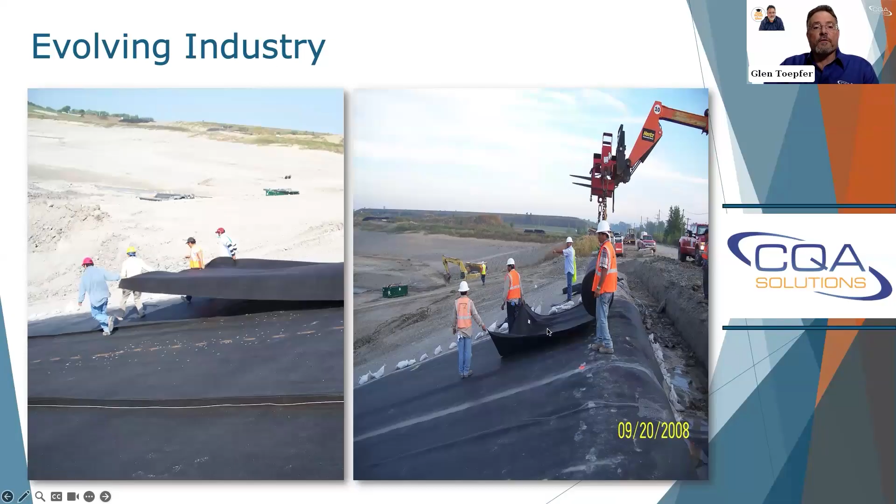You can see a more modern photo from 2008 - everybody's got hard hats on. I tried to find a picture from the 1980s but couldn't find any, so this is the closest I could find as a resource.

Fusion welders, thermal fusion welders - they were big and bulky. They often took two people to carry them, especially up and down slopes. They were hard to maneuver, especially trying to get through and around wrinkles and obstacles. Definitely much bulkier back then; they're a lot lighter today. I think the temperature, unfortunately, has been increased on the welders, which might be leading to some problems. But these are a lot easier to move and maneuver, and one person can carry them and perform the welding function.

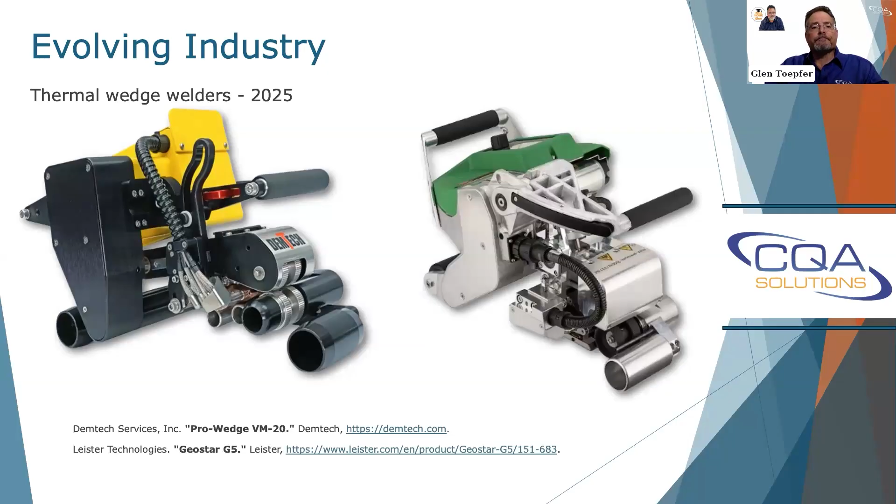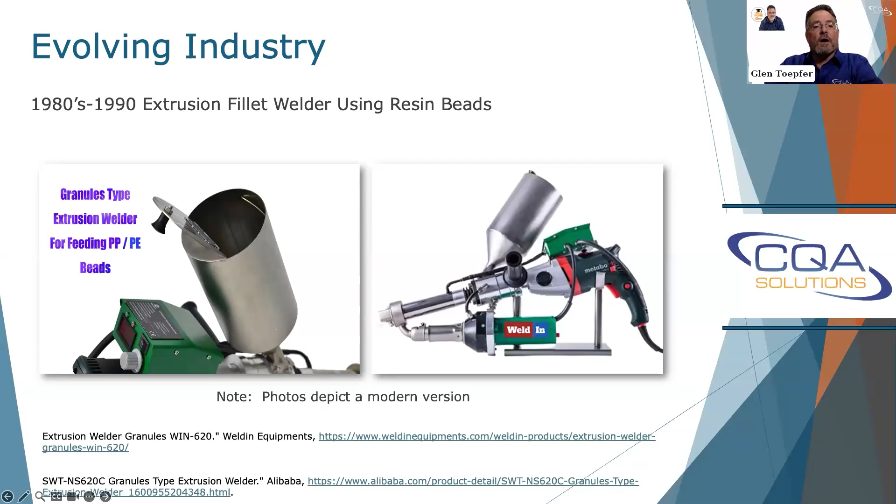When I first started, welding rod was coming into existence. Before that, you had canisters and you fed the extrusion welding beads in there, and those still produced good welds, but they were also a safety hazard because those beads got spilled on the geomembrane all over the place, and they became quite slippery when it rained or got dust on them. Unfortunately, this is a modern version that we could find online - I couldn't find any photos of the old style canisters.

These are the extrusion welders. They're a lot lighter than the ones that were out when I first came into the industry, especially the canister ones.

As I said, it's an evolution. We had resin beads poured into a canister, ground and molten, that came out the extruder. Then we went to hollow welding rod, which was pretty problematic in and of itself. Better than the beads, I think, as far as quality went, but both had issues with moisture and dirt, especially the hollow rod, with getting hot condensate in there if you had differences in temperatures.

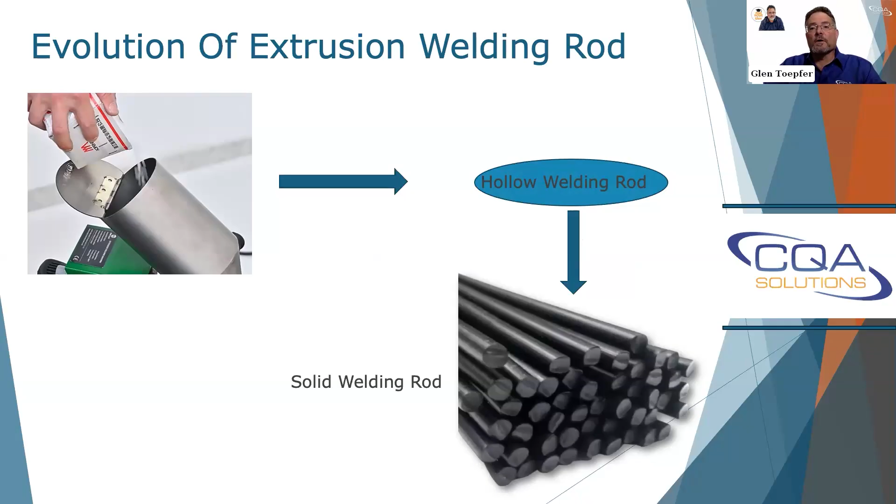So solid welding rod is what we now predominantly use, and I think that produces a much more reliable weld. But again, those are just meant to be examples that we're an evolving industry, and we're going to continue to evolve. So moving on to the owner at this point.

One thing that's important to remember is that even regulators who are approving this, the education level and knowledge varies in the industry significantly. You can have good regulators that are on top of it, and you're getting things approved with a higher confidence level. But you could have regulators that are new, approving this stuff, and they may have no idea what's good and bad. They may not do reviews.

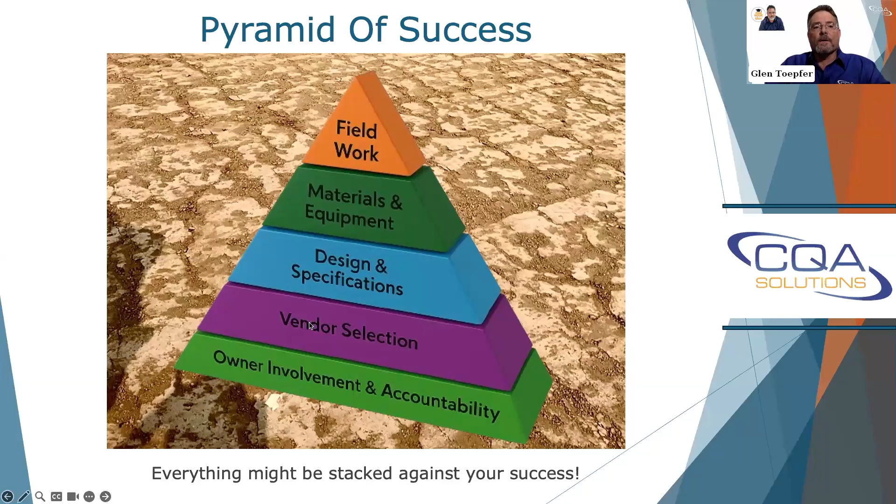In some states, reviews aren't done by regulators, which is hard to believe, but that's the case. And as an owner, ultimately, you're liable, no matter who's at fault, if there's an issue in the future.

So as an owner, some things we recommend are setting goals beyond just budgets and deadlines. What are your long-term quality goals? There should be goals as the project's constructed. Failure rates of destructs is one that comes to mind, something that you can have a tangible result on.

Vetting your vendors, making sure they have experience on similar projects, and then holding vendors accountable, which is done through daily involvement on the project. As an owner, if you're not out there keeping people held accountable, things can go awry pretty quickly, unfortunately.

And then that leads to construction documents, which I think are really, next to the design, the biggest hurdle that we have, the biggest challenge that we have.

We always recommend constructability reviews, because if it's not constructible in the field, unfortunately you end up with a field fit, and those field fits a lot of times are going to be inferior in quality than if it was properly designed. You're fitting something, you probably have poor welds, poor quality. If you can get it properly designed, the odds of improved quality are much better.

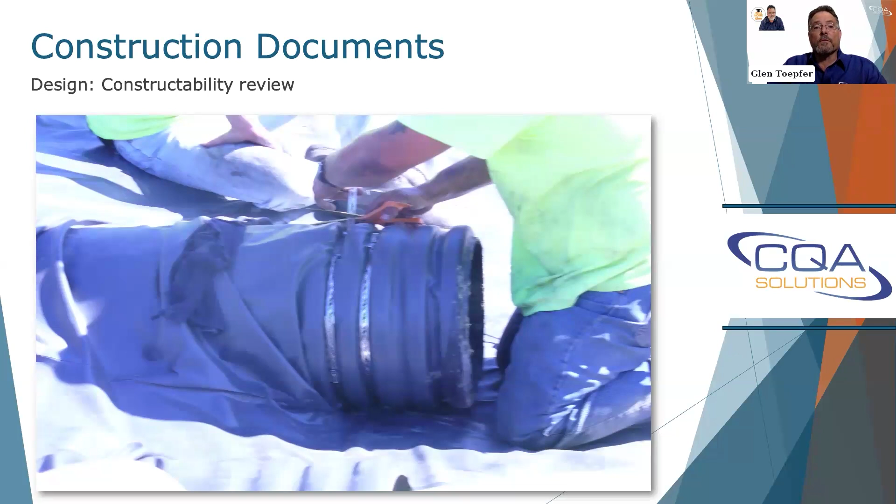And you also run into issues if you have regulators looking at your sampling frequencies and saying, okay, you didn't follow the CQA plan, why not? Or you didn't follow the tech spec, which was more stringent, why not? And they can cause delays in your certification.

The construction documents should also empower the certifying engineer and CQA team. Best practice: if you want it done, put it in the construction documents, in the tech spec, the CQA plan, wherever. If it's not in there, don't expect it to be done.

There's a lot of things that we see in the industry that aren't done because it's not in the specifications, and engineers claim they have no foundation to stand on. I don't necessarily agree with that practice, but it is what the regulator's going to be looking at. And if it's not in the document, they can't enforce it.

One of those things is, most specifications you'll see low ground pressure equipment is approved to work over top of the geomembrane - 5 psi, 6 psi, whatever it might be, pounds per square inch. But people will just push it over large wrinkles. So they drive over wrinkles. In this case, it was an ATV that met the specifications of 5 psi or less, and they drove over wrinkles all over the place.

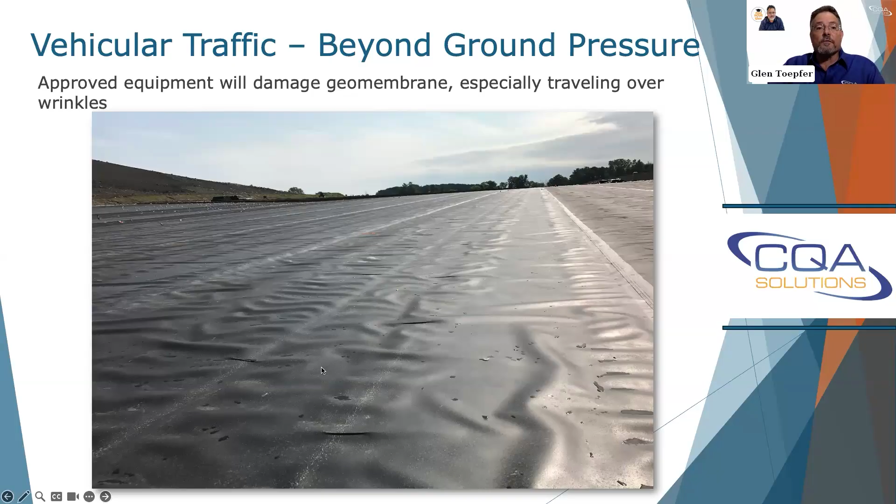You've got hundreds, thousands of these creases in the HDPE geomembrane. Creases are bad, they should be repaired. But again, it wasn't in the specifications. Also not in the specifications was that these type of damages needed to be repaired. So the engineer leaves it, and now the bottom of your cell is littered with all these extra creases.

Same thing with generators. We've seen creases caused by generators, especially the heavier generators with the hard rubber tires.

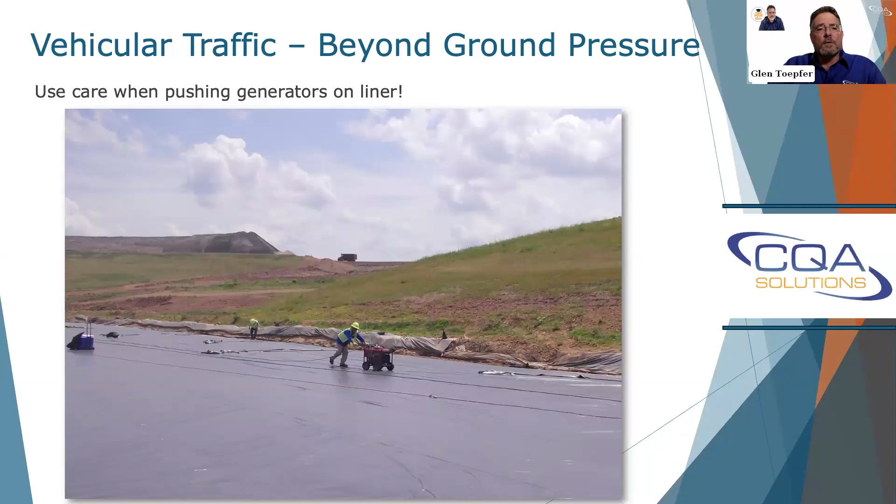And mechanical attachments and appurtenances, anything in the design—this is why we really stress the constructability review, trying to get these best practices implemented.

I gave this example in prior webinars, but you had an engineer that didn't know anything about the liner installation process, and a contractor that didn't know either. So they ended up, quote, nailing the crap out of the geomembrane to the forms. We ended up with hundreds of holes that shouldn't have been there in the first place.

Same project had issues with the corners in their design. They had welds that were supposed to be done right in the corner. Anybody who knows extrusion welding knows you can't weld right in the corner—even with these specialized nozzles people have come out with, you can't get a good grind in those corners. There needs to be good, uniform abrasion.

So the best thing to do is use prefabricated corners—get those welds out and away from the corners so they can be properly welded and properly tested non-destructively. It just increases your chance of having better quality.

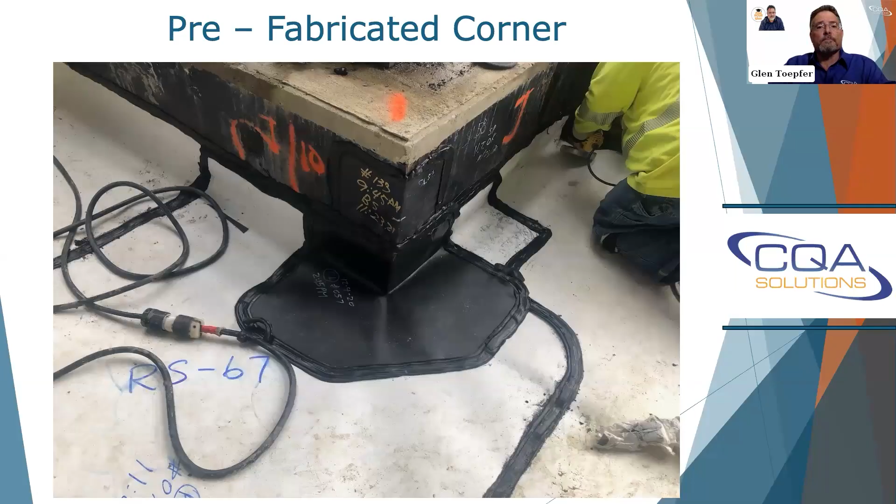Moving on to the pre-construction meeting—a lot of times, parties don't even do them. I've talked about that a lot in training and past webinars. But the party should be there.

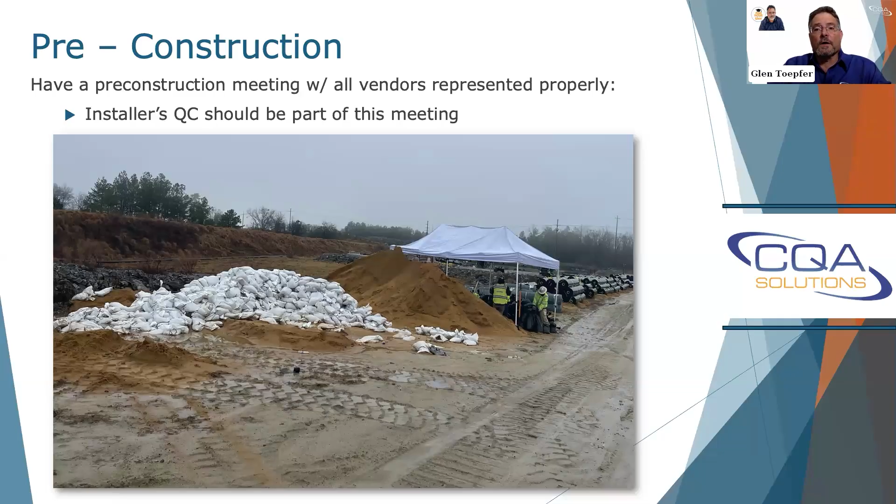CQA—this is a photo here—and the installer's QC should be there. We're driving up to the pre-construction meeting and the QC is helping do sandbags, not out there as part of the meeting. Often it seems like things said to the foreman don't get translated back to the QC, unfortunately, and it leads to the potential for problems on the project that aren't caught and should be mitigated.

Same thing with reviewing all the documents at the pre-construction meeting. Someone should come there as a best practice with a specification summary, reviewing your CQA plan, construction tech specs, and the drawings, along with a comprehensive list of requirements, making sure everybody's on the same page.

We see this not done quite often. GRI GM9 is a good example—it's a cold weather seaming plan, and everybody has it written into their CQA plan and tech specs. If the ambient temperature drops below 40 degrees or 32 degrees, whatever the cutoff is on the site, they're going to use GRI GM9.

Well, the temperature drops below that and everybody's scrambling to implement it. There are things in there that need to be approved by the engineer beforehand, and they're not approved, so the project comes to a delay. That can be a costly delay when you're trying to beat the weather, especially in cold weather and snow regions.

Safety is a big topic that should be discussed in pre-construction meetings, but often it's not. This is an example of a triangle of death, where you have a pulley system being used to pull a roll of liner—cable pulling with another piece of equipment pulling it through the pulley. The triangle of death is anywhere that pulley can break off and kill somebody, either the cable or the pulley.

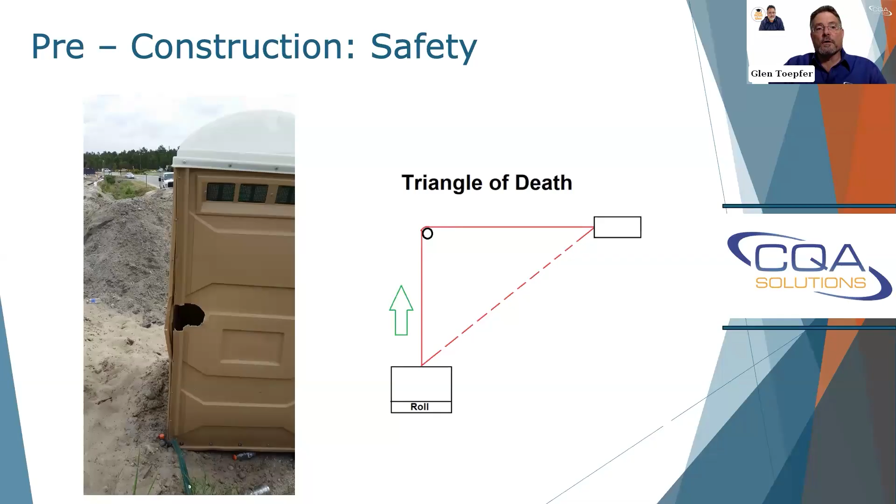More things on the pre-construction meeting: requiring supplemental or emergency work plans. I already talked about cold weather—there's also hot weather. What do you do with hot weather?

Early in my career, we worked till 2 a.m. trying to beat the rain on a project, and the crew started at the high end. I said, why don't we start with a sump? They said, no, we're going to work towards the sump. It didn't make sense to me, but I was new in my career. By 2 a.m. they shut off. They don't want to weld around the sump because they're too tired. So they left it open, came out the next morning, 4 hours later after it had rained, and it was flooded. We lost a GCL below, had to cut it open and repair it.

In that case, it might not be the worst thing that happened, because those guys were already too tired. They probably would have had poor quality welds anyway, but they should have started there while they were fresh. But things like that happen. That's why you need a plan.

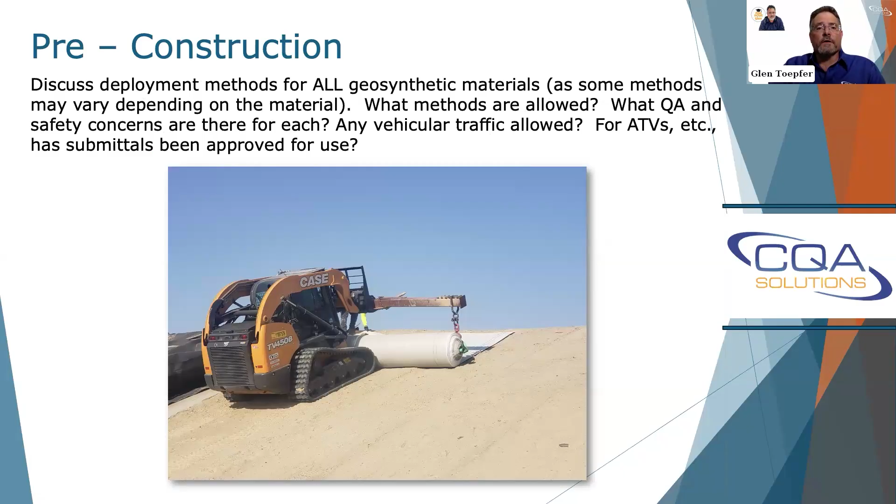Same thing with material deployment. This is often overlooked. How are you going to deploy materials, especially over top of other materials? What's allowed? I already talked about low ground pressure, but you don't want to drag materials over subgrade or over top of other materials. You get scratches and damages that often go unseen and result in issues in the future.

So I'll move on to earthwork now. One of the first things you get to on earthwork is your tie-ins. They're going to be exposed. Compacted clay liner, you're tying into an existing cell. I didn't go through the sequence and photos here, I just went with a final photograph, but you'd be benching into your clay as you build it up, and then you're going to tie in.

Well, this is all going to be exposed at the beginning of the project so they can tie in and bench in. When that material is exposed, somebody should be there to mark and record damage locations so they can be found again. The material's often damaged as it's exposed, and this material gets covered up. It might get silt running off in rains and be silted over. People will think there's no damages there when in fact damages may be there, and they're lost and nobody ever finds them again.

So if you don't mark them as the material is exposed, waiting, to me, is an inability to ensure all damages are located and repaired. Even if you're doing a leak location system, you can't guarantee a lot of times that you're getting over areas that may have had damage.

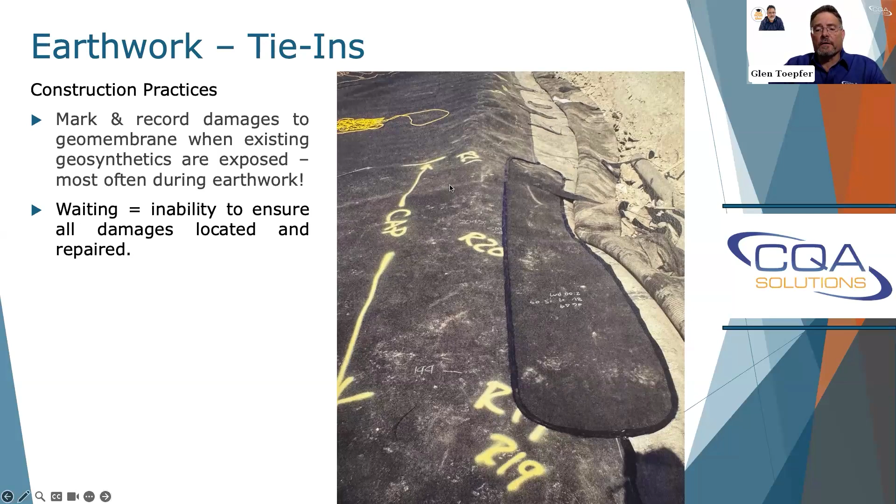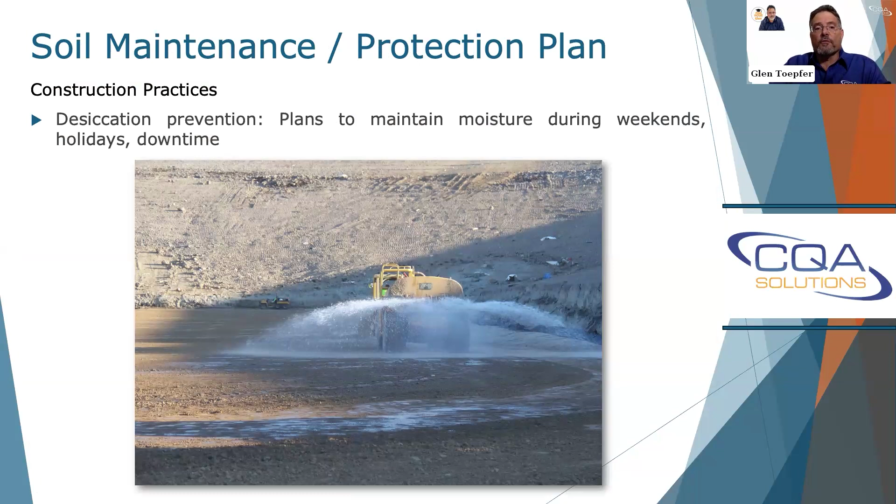Soil desiccation, this is another big one. It's preventable, but it's a big issue largely because people don't have a soil maintenance or protection plan when they're doing earthwork. What are you going to do during weekends to maintain moisture conditions, holidays, downtime? These things should be done. There can be a watering plan, but contractors don't want to pay their people to come in on overtime on a holiday weekend to add moisture. So what are some other options? If you're not going to do that, how are you going to protect it? These things should all be addressed.

Similarly, nuclear gauges, how do you confirm that the numbers you're getting are actually representative? I've seen projects run into issues that could have been avoided if you just took time to do drive cylinder testing of the moisture on a regular basis. Before the project, you can even do it on a trial area. Have the contractor do a little trial pad and test it out. Make sure you're getting proper results, because sometimes there's a chemical composition issue, something with the material that just isn't right.

The gauge may be wrong. I've seen it. And these things are all easily avoidable and can greatly increase the efficiency of your project if they're thought out and done before the project begins, or at the very inception of the project.

The world of construction stakes, it seems like we're getting to fewer and fewer construction stakes with GPS, but we still see them used on projects here and there in compacted clay liners. When it's a compacted clay liner and you're dealing with permeability issues, those stakes need to be removed. It used to be written into specifications that they needed to be removed, each lift staggered, things like that. But you don't see that much written into the specs anymore because GPS is there. So if you're on a project where construction stakes are used, you need to keep that in mind.

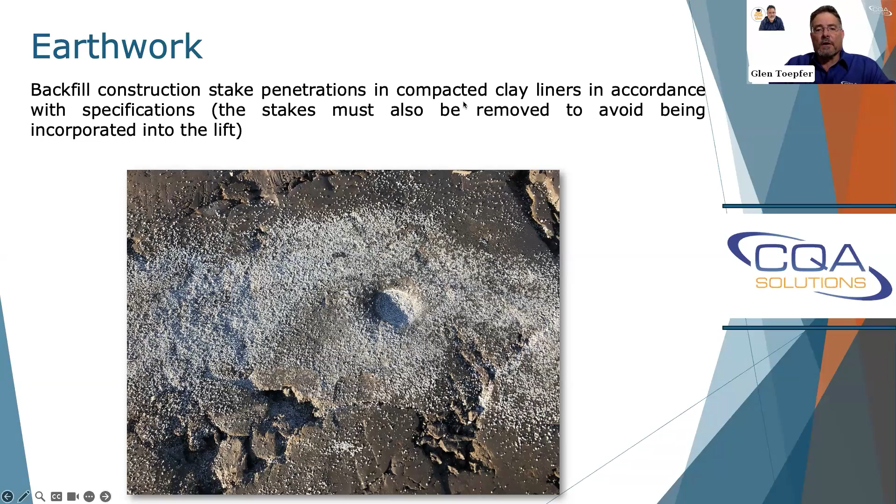So that's really the last of the things I have on earthwork. I'm going to move into all the different steps of the geosynthetics here for the majority of the rest of our time together. Materials, I like to warn people of this.

I've talked about it in numerous training classes, but beware of average test values. Look at the values, examine the values. A minimum required value can be misleading. You can make that minimum value, take the case of this break elongation.

You have 4 of the 5 coupons tested, over 110% of the required value, but yet you have one value at 44% of the required value. The overall average is fine, but what about this low number?

It's something that people need to look at. We've seen it on projects where these low values cause problems. They can be problematic for the welding, the installer doing their welding. We've seen where these low values in thickness sometimes combined with other values lead to problems with the welding, and people are blaming the installer when really it's the material itself that's causing the problem.

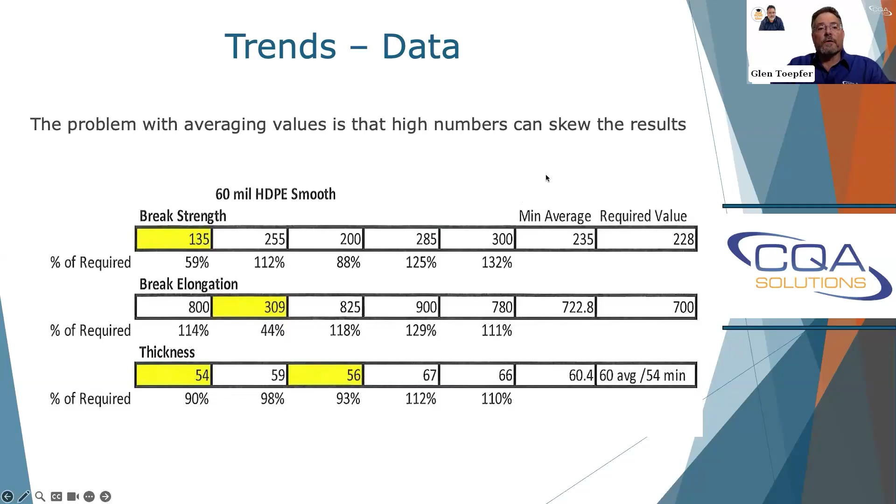What's acceptable? I can't really say that. I don't have enough background or experience there, but you need to look at it. What's an acceptable standard deviation, maximum value, minimum value? I think minimum values in some of these instances may be better than the average value, or an average value with a minimum value, or standard deviation, something to that regards.

That's just something that, best practice is to look at this stuff and maybe do some additional testing if you're seeing issues like that.

Then when it comes to doing your physical inventory of material that's shipped to the site, be aware of rolls that are missing in a sequential order. Most of the time nowadays, you're going to get production runs that are made for your site. You'd expect the rolls to be chronological in order, but if you see gaps, hooray, you should commend the manufacturer.

They probably caught something. But one thing a lot of people don't realize is, although they caught something, their testing is going to be at a certain portion of the roll, and that may miss if the issue propagates itself. We've seen that on projects where the issue's in the first footage of a roll, but it reappears later on in that roll or the next roll outside the rolls that are missing.

So just something to keep in mind there. You may want to do further examination. Might not warrant testing, but it definitely warrants your field people keeping an eye on the material as it comes out and seeing if there's something different there.

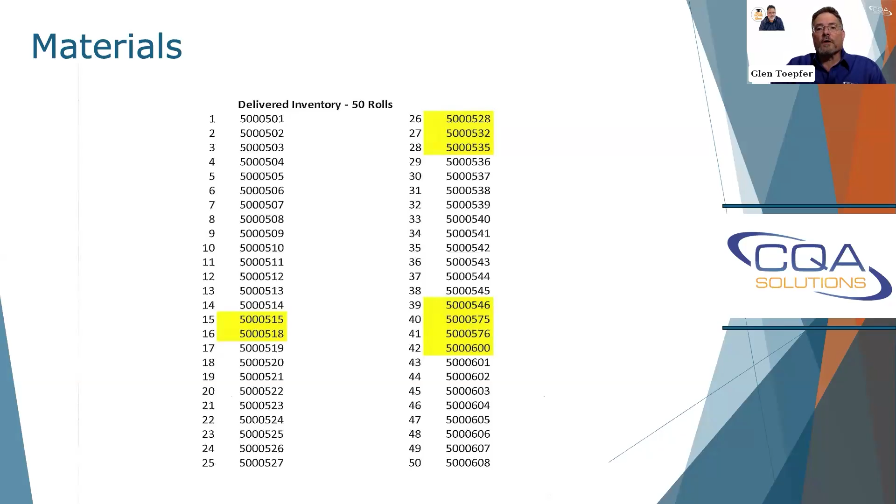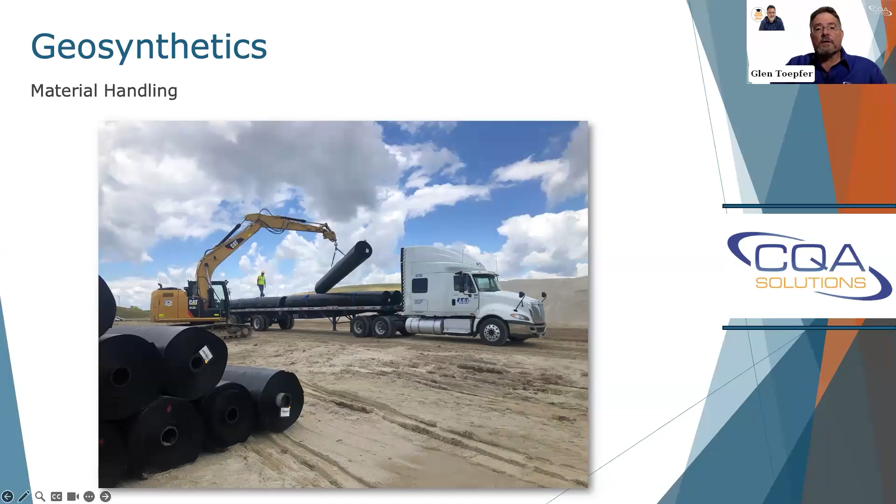It's going to be in the seam area. The installer is going to have to do a better job of seaming, cleaning the material, and it's something that's avoidable. Just take time to get it elevated per the manufacturer's requirements off the subgrade, and you don't have to deal with that issue.

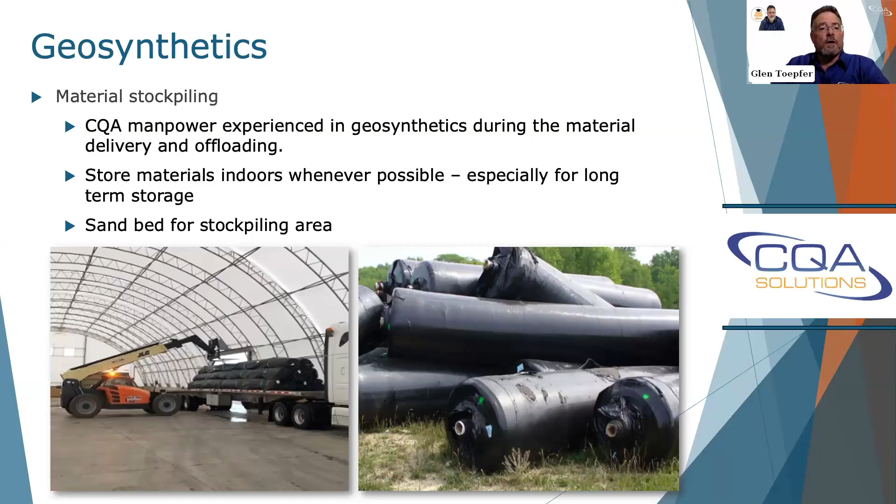Inventory control - I mentioned an approved inventory list. I was talking about looking at past examples of sequential rolls that are missing. Somebody should provide an approved inventory list that's used, and the technician should carry that with them. One procedure we use is having the approved inventory list in our electronic collection, so if a roll doesn't come up on the pre-populated menu, technicians know to take a look and ask why isn't this roll there. That's how we catch material issues.

You should have continuous updates daily, checking the material as you inventory it. Spray paint is a good way people use to mark which rolls are there and approved. We always recommend spray painting on the core, maybe on the face of the liner away from the edge of the sheet, but never on the edge itself, because the paint gets in there where they have to weld. Sometimes the installer can't clean it out, and now you have a bad seam in that area that can carry forward.

Mark 'do not use' on rejected rolls clearly, because inevitably they'll end up in a stockpile where people think they should be used. That's one way to avoid it - ideally stockpile rejected rolls separately, but people come over and try to cut it for repairs or use it as a rub sheet. Everybody says okay, you can use it as a rub sheet - well, now the paint marking gets lost and it ends up being inadvertently used. So the best thing is just to keep it out of there and not use it for anything.

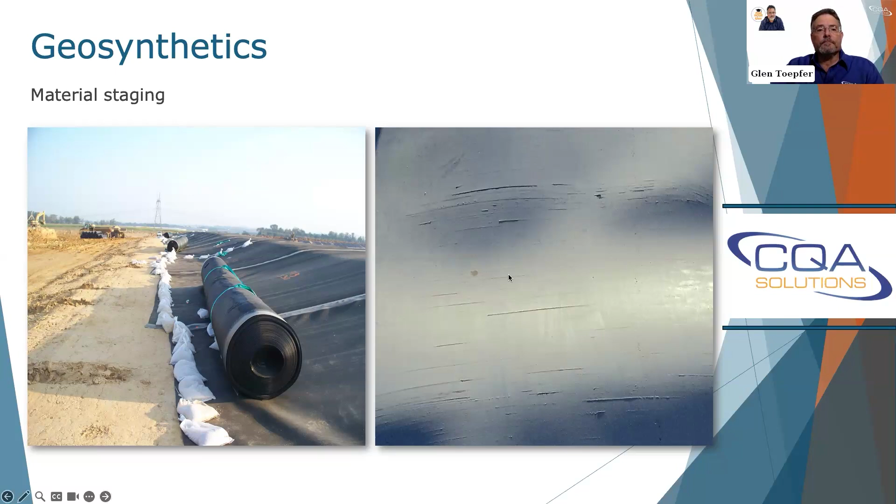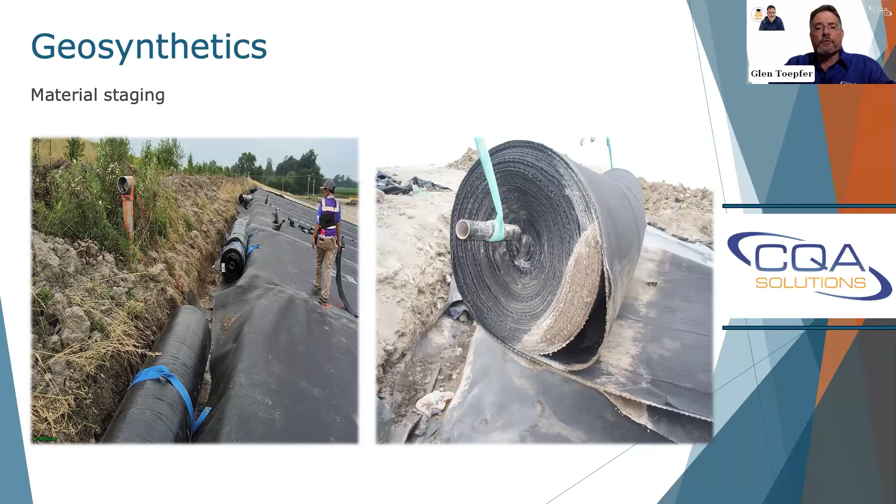Don't drag materials over the subgrade. I've said that before, no matter what material it is - if it's on top of a geomembrane it's especially true, and the same principle applies on top of a compacted clay liner or any other earthen subgrade. You want to lift the material up so it's not riding along the ground. You may have to put down a rub sheet, pull it out on the rub sheet, then slide it into place to minimize dragging. But these things all take time, and that's part of why they're not done. We end up with inferior products because of it - scratches underneath that nobody sees, and sometimes holes, because people step on things that got dragged in there. There's a whole host of issues with dragging materials on a subgrade.

Another issue we don't see as often, but some of these materials still use staples. Some are getting to plastic cores, but anytime you have material with staples in them, there's a risk of those popping off. The best thing is to control your deployment and then trim off the material.

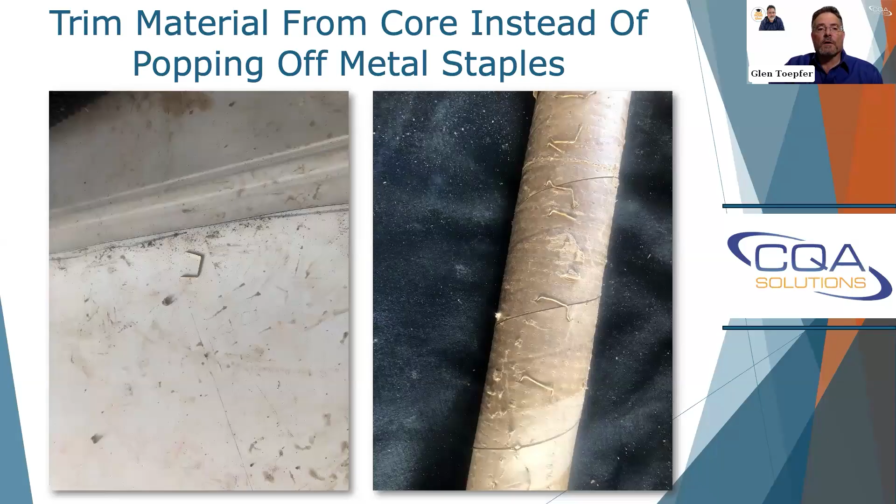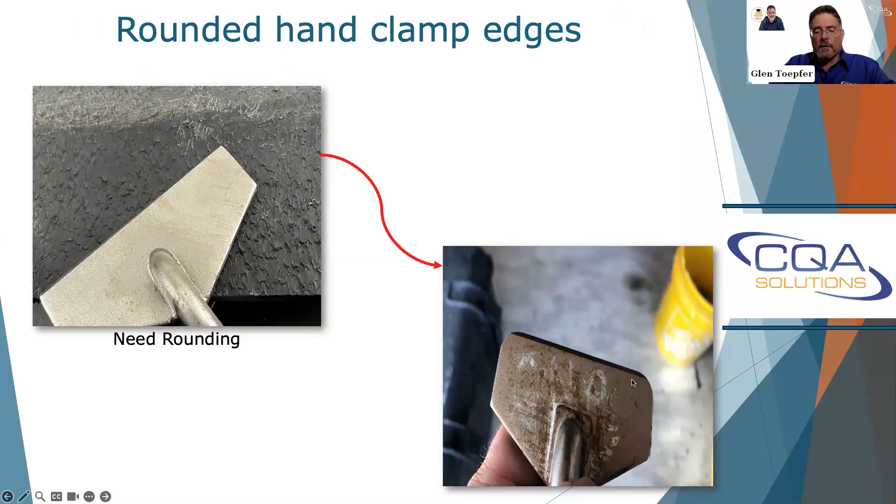This next photo is from a marketing advertisement from an installer, and they're showing clamps that aren't rounded, and they're showing damage right here as a result. That's what happens - you do get the damage.

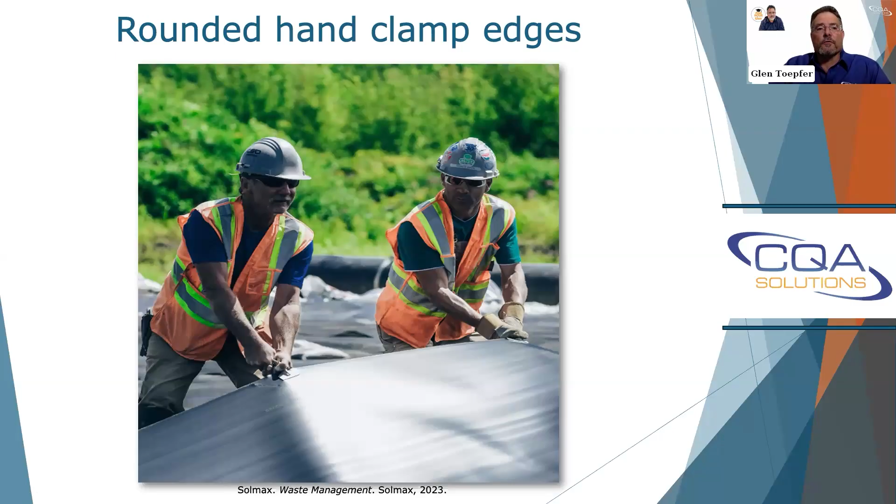This is one of my pet peeves in the industry - some of these practices, people don't care what they show on their websites or their projects anymore. You can look around LinkedIn, you can look at websites, you see it all over the place. Some of these things that are best practices, or even normal practices, aren't being followed, and it ends up with people looking for resources taking these practices as well - it's on my website, or we've seen it on somebody's website, so we thought it was a good practice. I think as an industry we really need to self-police that and use better care of what we're promoting out there.

I think I talked about this one in a prior webinar, but they spent four to five hours looking for this damage. It ended up being a 400, 500 foot seam. So they did isolation - cut a hole at 250 to see if they have air. They isolate one side, it's leaking, the other isn't. Then they go to 125 and kept isolating it down till they had a 4 or 5 foot section where they could find this, and they cut that section out. But now you've got two dozen extra holes in the liner. I suggested they should just cut out the seam there and replace it instead of putting extrusion patches on, but they didn't. So now we've got an extra two dozen inferior welds out there that we didn't need, all because somebody had these hand clamps, plus the lost time.

Gridding seams and panels, regardless of whether you're using GPS or not, gridding is still a viable practice. You want to keep your paint or whatever marking you're using away from the seam - it shouldn't be right on the edge - so there's room for repairs if needed. That's one way you can quickly reference damages, and ensure everybody else on your team uses the same measurements. You may not use the same measurements as the installer, but from a CQA standpoint, using the same measurements means everything at one location is referenced to the same measurement, and you don't open Pandora's box.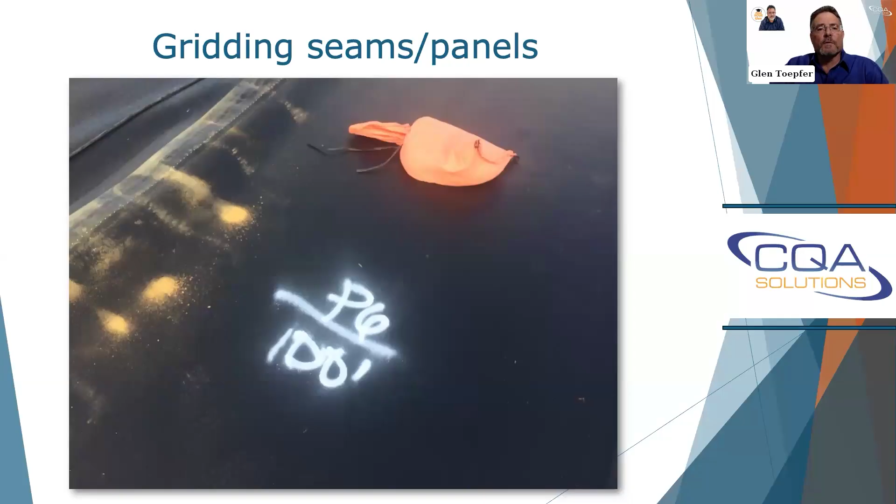Is that 2 foot repair at station 35 really the one that was at 30 feet by somebody else? It just is a better way of doing quality control anyway.

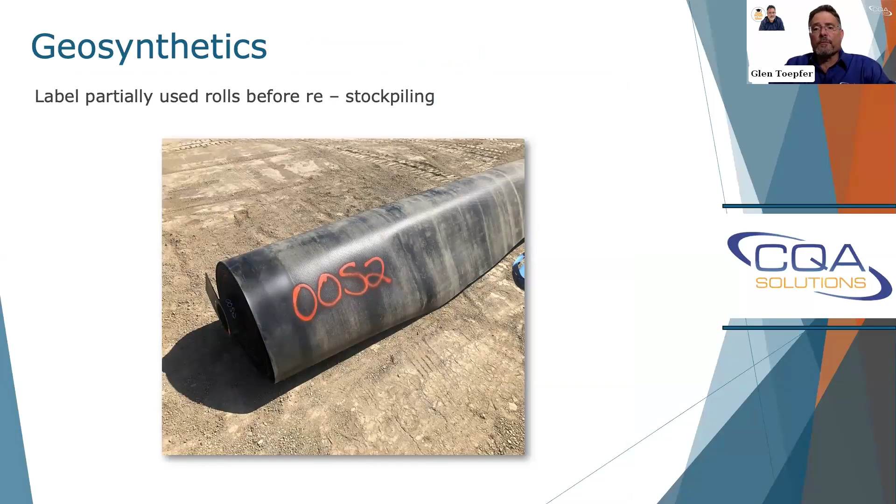Partially labeled, labeling partially used rolls. This is critical. I think it's not done often enough. It used to be in all the specifications, but again, it's something that seems to have slipped in a lot of recent specifications that we're seeing.

Labeling the corners with a panel ID. This is especially important when you're having people that aren't familiar with a liner, like a third-party surveyor, come out there and do the as-built.

In this case, the paint mark should have been placed further away from the weld so that it's not in the way if you're doing a repair. But it's handy to mark these, and a lot of times the surveyor is not going to look around to try and figure out what panel they're on. It makes it a lot easier for them.

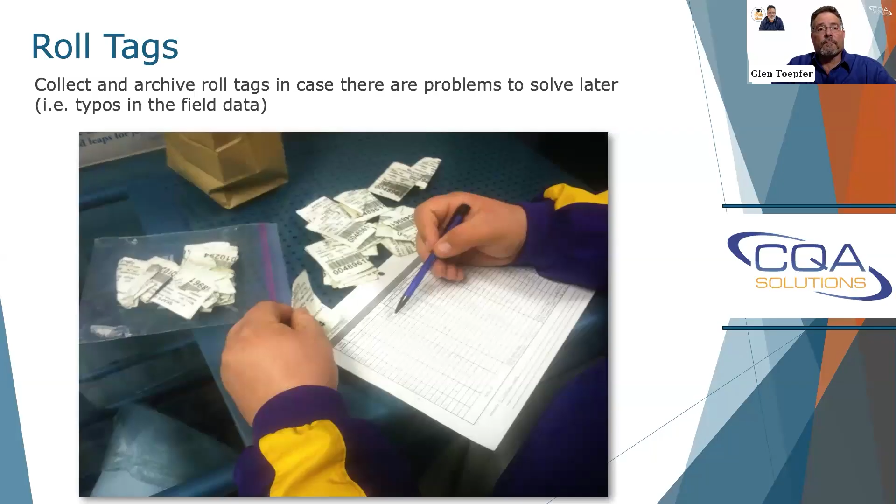Roll tags, collecting roll tags as a CQA, I believe this is critical. This is something that you should be doing to help figure out what rolls and panels were used that day, so you're always on top of your inventory control. We found it to be very helpful in our field experience.

Trial seams, moving on to the trial seams, a lot of specifications don't really deal with your starting peel incursion. Everybody goes by the GRI GM19A, that 25% peel is allowed on your D-strips, but what peel should be allowed on your trial welds? My argument is always that you should start at zero.

You always want to start with the best weld that you can and allow the most flexibility in case something goes wrong. You don't want to start at 20% or 25% and then have all these seams failing because you started close to your limit. Just a best practice that we've seen.

A lot of people incorporate this one now, but people don't write it into their specs, unfortunately.

And you start seeing more of these breaks, and they're at the edge of the weld. What we've learned as an industry is that part of that's being caused by this overheating that's going on in the industry. As I mentioned at the beginning, earlier versions of fusion welding, the thermal welds, wedge welders couldn't go as high. They didn't go to the temperatures they do nowadays. And that may be part of the reason.

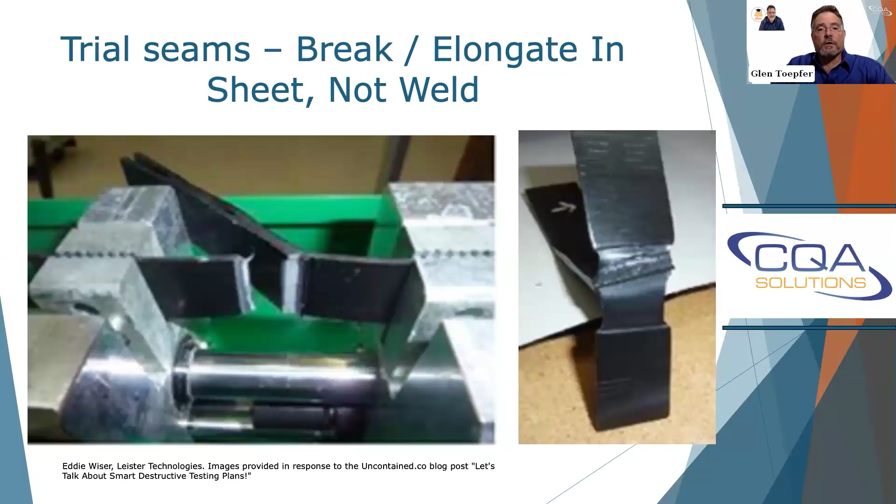We're still evaluating this. There was a big panel discussion at Geotechnical Frontiers earlier this year. We're trying to address what needs to be done. How do you stop the overheating, because you're getting passing peel and shear, but you're compromising the geomembrane?

Along the same principle, you want to do your trial welds on the subgrade. This is another one where you don't see it on the specifications as much as you used to, and it can be problematic. You end up in arguments, and you end up with engineers saying, hey, I can't enforce it, it's not in the specs, but somebody should have put it in there. Somebody should have put it in the CQA plan.

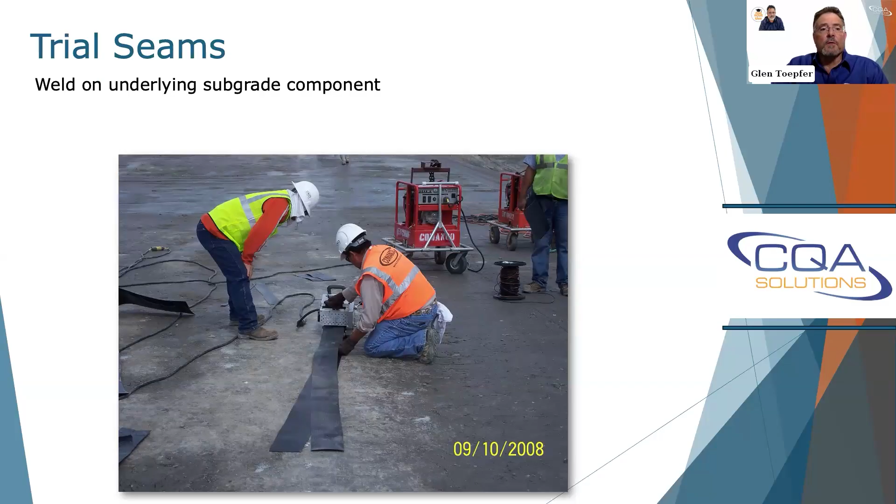Welding on the underlying subgrade component. In this case, it's not earthwork, it's geosynthetics. They're placing a secondary geonet between the primary and secondary geomembrane. So the geonet is actually on top of the secondary here for their trial weld, and they're welding. That allows you to make sure that it's not burning through, not sticking to the geonet. You're getting the proper penetration and the proper settings for the materials.

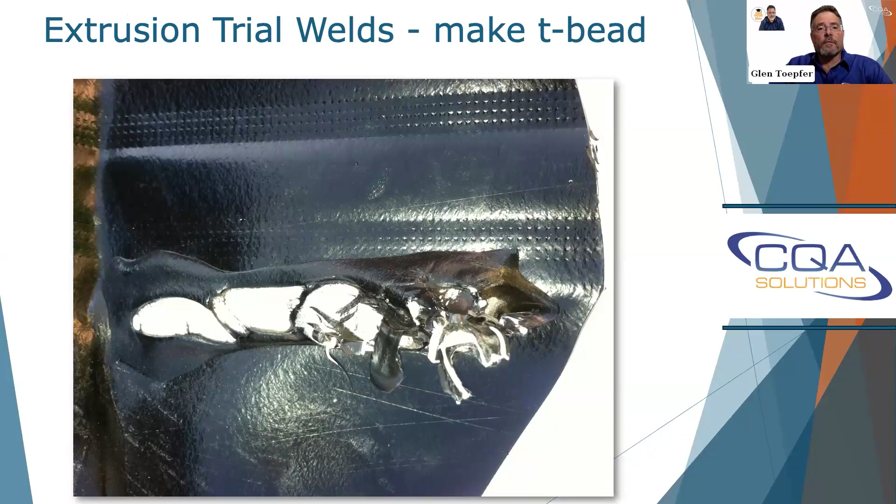Trial seams, as far as extrusion goes, I feel, and I've been saying it for at least 10 years, that you really should be going by your operator and your prep crew as a whole team. You find that the person doing the grinding can make or break the extrusion weld, but so does the heat tack.

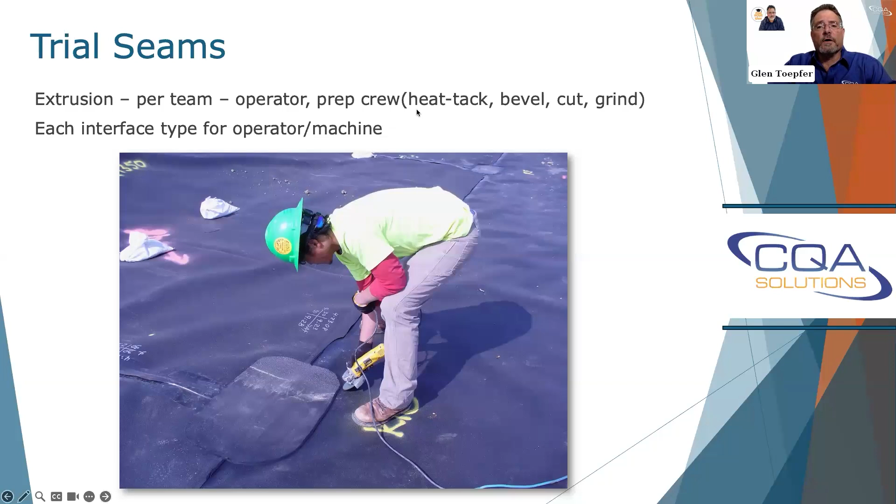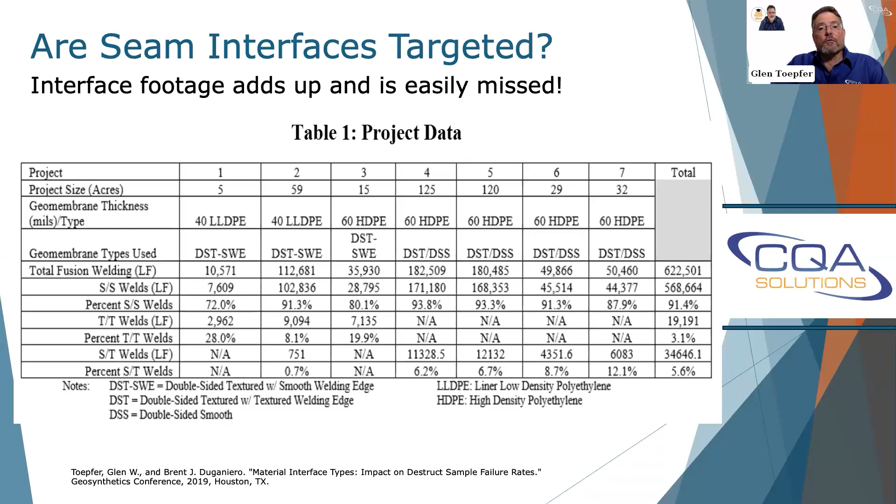footages, and your footages all add up pretty quickly. And a lot of times these are missed. If you're using a smooth, textured geomembrane with a smooth welding edge, you'll always have different interfaces, and they should all be tested. The reason they should be tested is you'll see smooth has a much lower failure rate on destructive sampling. Anytime you involve textured geomembranes, that failure rate goes up.

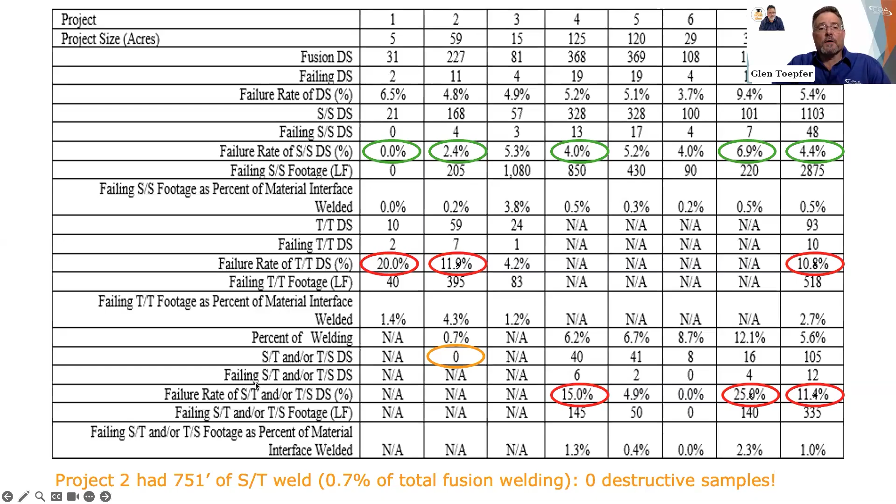As an example, on this project we had 751 foot of smooth textured weld, but no destructive samples were taken on it, even though failure rates tend to be higher.

And then tracking—I've talked about this in past webinars too—are they being tracked properly? Everybody will track destructs chronologically in the way the seam was welded, but what happens when the operator did 20, 30 foot wide textured cross seam, and then they move to smooth. If that fails on the textured chronologically, the study we did showed they always pass when they go to the smooth, but nobody's looking at the rest of the textured they did. There should be some type of protocol dealing with that.

End coupons, maybe not full destructs. Nobody wants to cut destructs on every single cross seam out there, but something needs to be done and looked at.

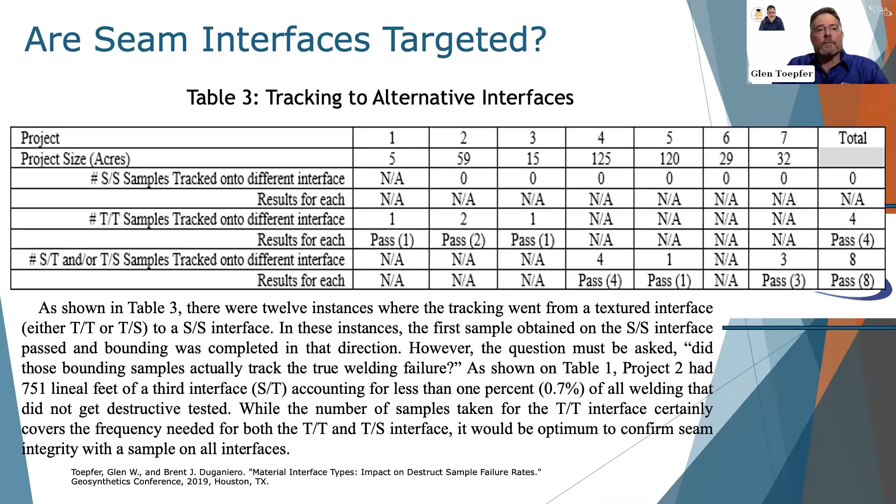Another big thing a lot of people don't realize is that you need to verify the load cell numbers for the calibration certs. We find this quite a bit where the certifications don't add up. On a Demtech machine, they display, at least initially while it's initializing, and you can confirm them to the sheet you have. You need to do this on a regular basis because those things can be swapped in and out by somebody that knows what they're doing.

I'm not familiar with other manufacturers, but I speculate some are similar. So you always want to verify.

Same thing with where you set up the tensiometer. There's going to be a lot of foot traffic where the tensiometer is set up because they're going to be going over there to check their trial welds. Best practice would be to perform it off of the installed geomembrane. Otherwise, they should put down a large rub sheet under the area where people are going to constantly be walking to. People tend to drop equipment, drop knives, be cutting there.

Best thing would be to not do it on the geomembrane, but if it has to be done on the geomembrane, take appropriate preventative measures.

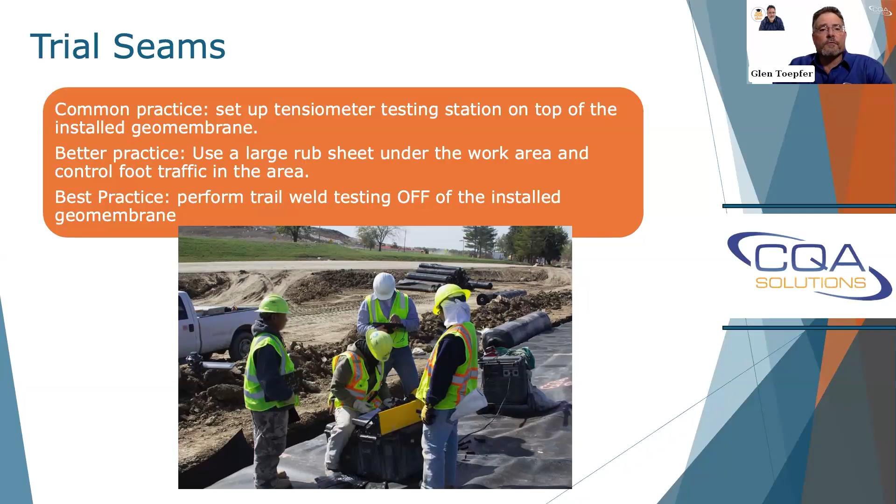Then you get to welding, different types of welds, these vertical welds, both fusion or extrusion. If there's vertical welds, now you have gravity pulling down. You can see the effort this guy's taken here, trying to weld. Unfortunately, it's about as tall as him, so now he's going to have to reach up over his head.

Things like that, you can do vertical trial welds. You can set it up—we've done it in the past. Sometimes the settings and procedures need to be adjusted for that vertical welding, but they're not caught. If you're doing the weld on a horizontal, you can obviously apply a lot more force, and you end up with inferior welds when it gets to vertical welding. So those type of precautions are a best practice we suggest.

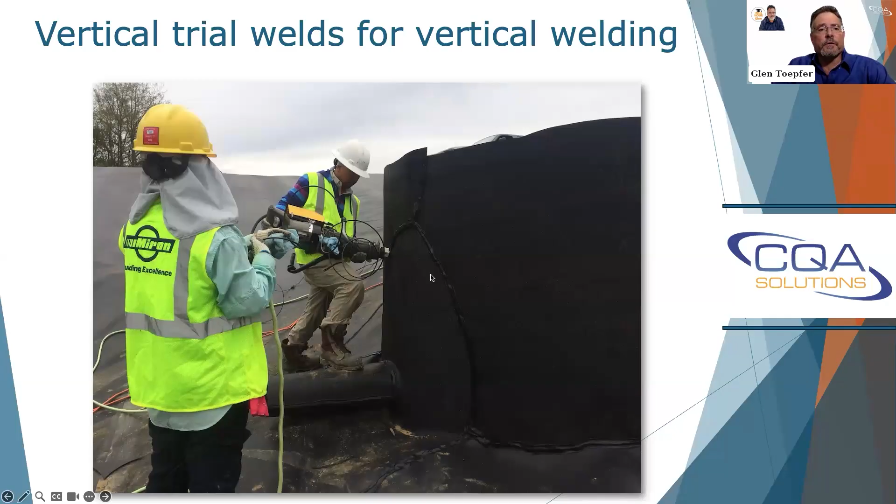We always suggest cutting the coupons with dies, but dies get damaged, broken, need to be replaced, things like that. You always need to correlate the coupon back. You can't take the value on the screen, because it needs to be correlated back to the proper width.

For a 1-inch wide coupon, if it's required, 91 pounds per inch is required for your peel test on 60 mil. Does 99 pounds per inch at 1.1 inches wide coupon pass or fail? You've got to divide it out. You'll find out that it fails.

It's going to come out to about 90 pounds per inch when you divide it out, so it fails. At 100 it would have been 90.9. That's why I didn't use it. I didn't want to get into the debate about whether 90.9 rounds up to 91 or not. That's something somebody else can debate. I'll leave it there, I'm not going to answer that one.

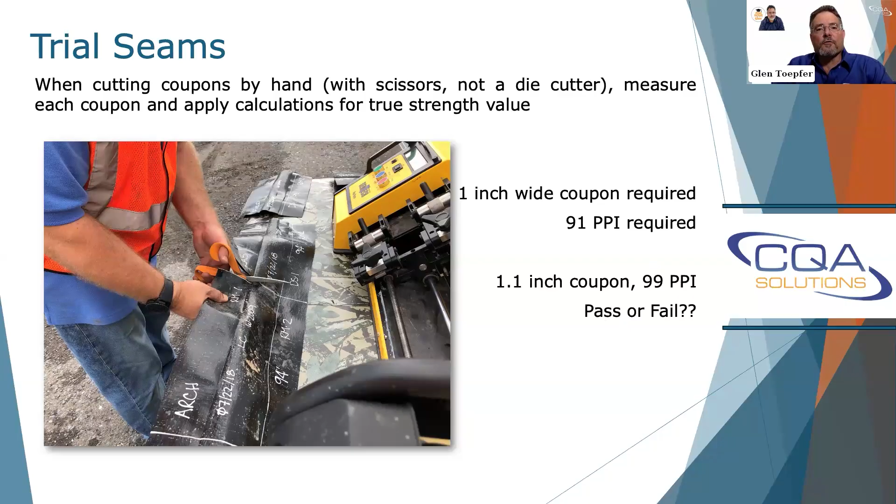Trial welds, the crosshead speed. You feel like you shouldn't have to tell people to verify this, but it's best practice. Any engineers or regulators out there should be looking at these. Are these people on your project doing this? Are they testing at the right crosshead speed? A lot of times you'll find that they're not.

Demtech gauges, it's right there on the screen, or Demtech tensiometers. I think Leister has it as well on the screen. But there are some old machines still out there that don't have it, and you can measure it - mark something, measure 2 inches, measure 4 inches, calculate it back out, see what the actual crosshead speed is. If you're using the improper crosshead speed, it does impact the results.

Production seaming, proper electrical setup is essential. I've talked about that in past webinars. There's guidelines on the length of cord, gauge of cord, number of connections for different welding machines. But this one I wanted to highlight - best practice ideally is you don't fuel on the geomembrane or in the cell, but fueling in the cell is just about unavoidable anymore, it seems.

So the next best practice is to make sure you have some type of containment system. Here they're on the subgrade, but you really don't want to have a spill on the subgrade either. But if it is there, at least it can be cleaned up a little bit easier and disposed of in the proper manner. Rub sheets with lips, for spill control, is a better practice.

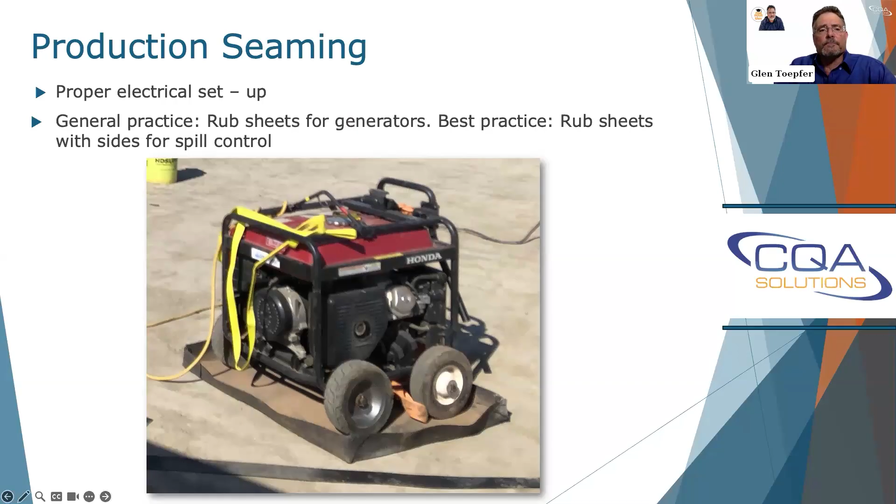End coupons, we always recommend end coupons. They're a free quality check, but they're only as valuable as your specifications, so you need to include details. Are they being tested by hand or tensiometer? Our recommendation is by tensiometer, but that ties up people. Our recommendation is that they be QA observed, otherwise a lot of times they just get thrown away and nobody says what happened. What's the frequency? Is it every seam? What do you do if it failed? Are the values recorded? These are all things that really should be addressed, and they can help the overall quality of your project.

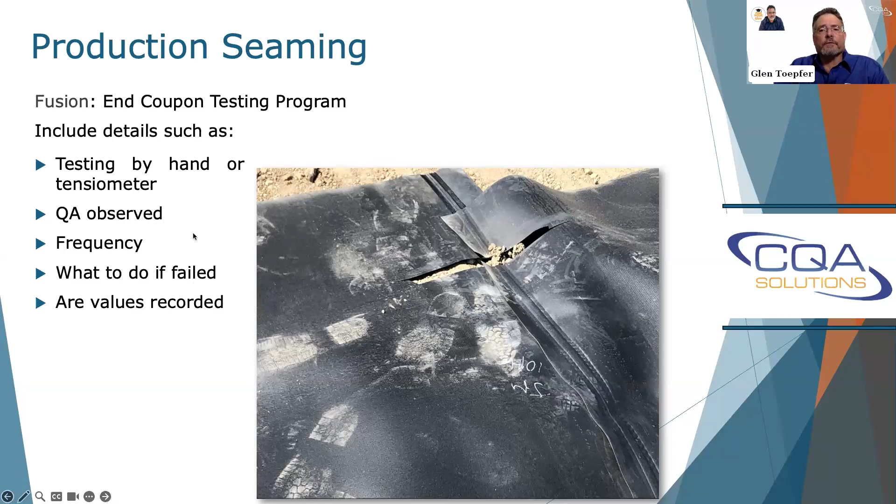It shouldn't have to be said either, but a best practice is to periodically check for the proper welding rod and the resin from the manufacturer. Everybody says HDPE rod is good for all the HD products out there - at least that's a general belief. Nobody gives a different answer, but I think because of the proprietary blends of the different materials, you're better off going with a resin from the manufacturer, and it should be the proper resin, HD resin for HD liner. I think that's the best practice you can go with.

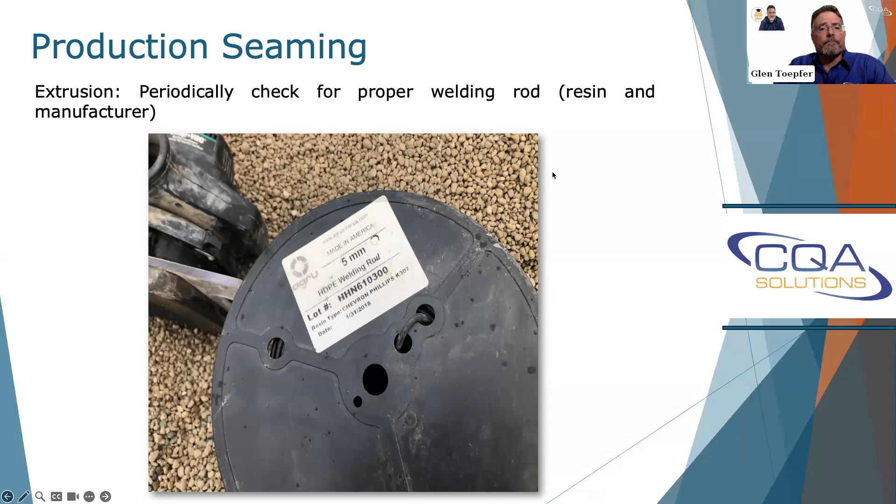Another thing is, you really want to take a look - if you're an engineer, a regulator, somebody out there visiting the site, and you start seeing 30-30 on all the air tests, watch them do their air testing. There are people out there that'll do 30-30 on each test, but it's time consuming. A lot of times it might be 29, might be 28, and it's written down as 30. We've seen it's 35 and it's written down as 30. Well, you walk by later and it's down to 30, you don't know that it started at 35, so now you think the test passed when it might have failed.

It's really critical to get people properly trained. That should go without saying, but it doesn't, unfortunately. So it's always something to look at.

Vacuum boxing - a few things on vacuum boxing. A lot of times the vacuum test operator is going to be your lowest guy on the totem pole. They're not trained, so we suggest doing a blind leak on a scrap.

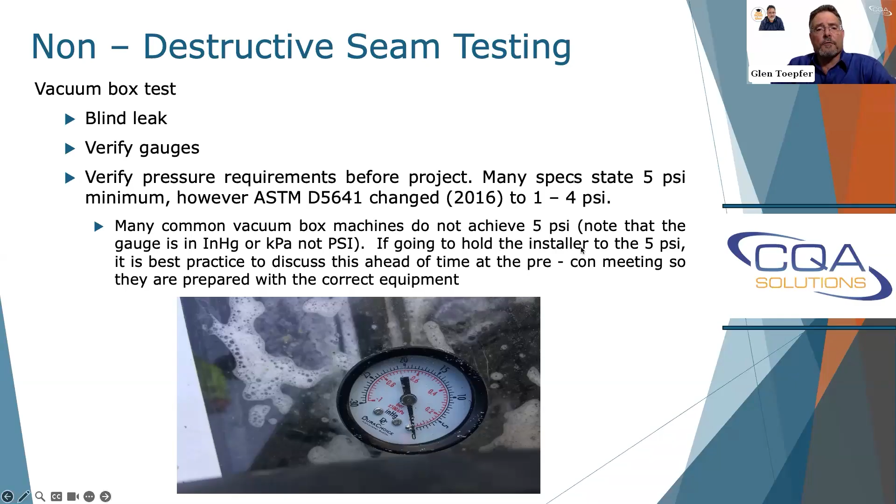Make sure that they can identify a leak and know what to look for. Verify the gauges are working, and verify what the specs are. Are you testing to 5 psi, or is it lower than 5 psi? That typically can't be achieved by shop vac motor type vacuum boxes, so you need a Venturi system in a lot of cases. All that should be looked at and ironed out.

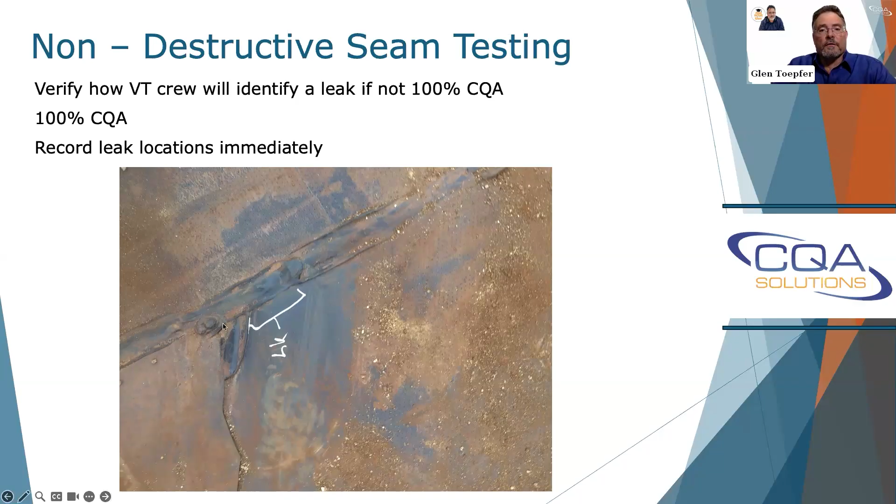How's the crew going to verify a leak? If 100% CQA isn't there, sometimes they don't. Our suggestion is to have 100% there, but these markings should be recorded immediately if you get a leak, because things get lost. If they write it over dirt, a lot of times it'll wash away. Things get missed, leaks get missed.

You'd think it would go without saying, but don't apply water on the weld until it's cooled for your vacuum testing. That's just good practice. Otherwise, you're shocking the weld and could be causing crystallization, long-term damage to the weld.

Retesting program - we found on some of the longer-term projects you go back and retest a certain amount of patches a day where you tie back into something that's close. You don't want to walk back through something that's been completed, dragging equipment all over it. It needs to be close, but we found where poor grinding has led to failures, and you've got to go back and evaluate that.

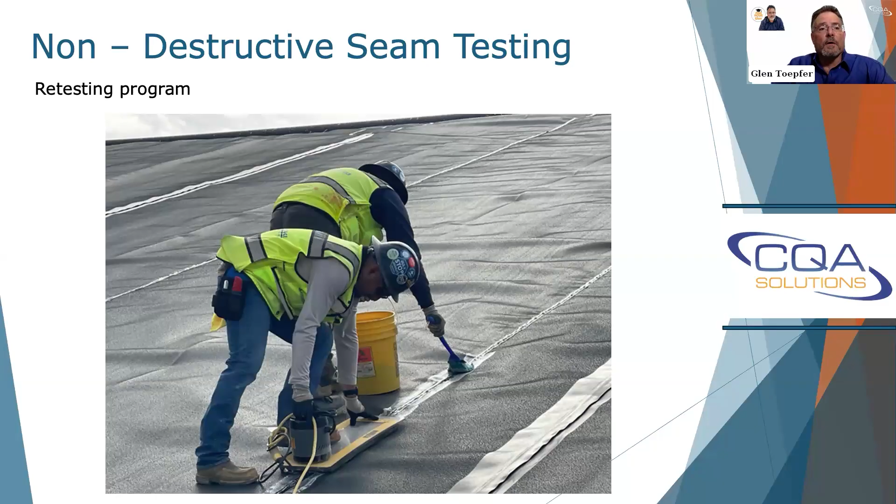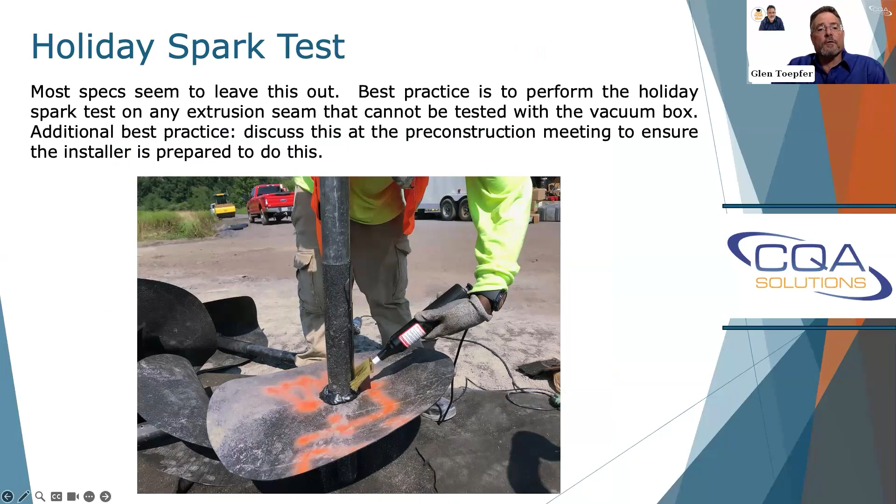Holiday spark testing - a lot of specifications tend to leave this out. I'm not sure why. It used to be common years ago, but you want to have your welds tested to the best ability possible. So you also need to get that discussed in the pre-construction meeting and what the proper operational procedures are.

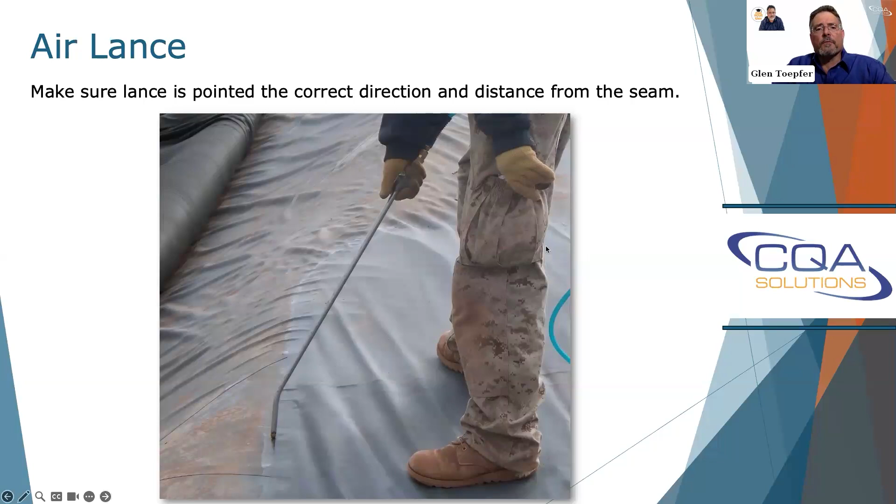I really left this one in here with the air lance as a reminder. Regulators, engineers, technicians as well, but you need to make sure your people are doing and understand the proper procedures when you're out there inspecting. You should be able to identify as an engineer that, hey, this guy's not doing this right. I see he's not doing it right from a photo, I see it's not doing it right in the field. During my site visit, what's going on? Why is that happening? And address it.

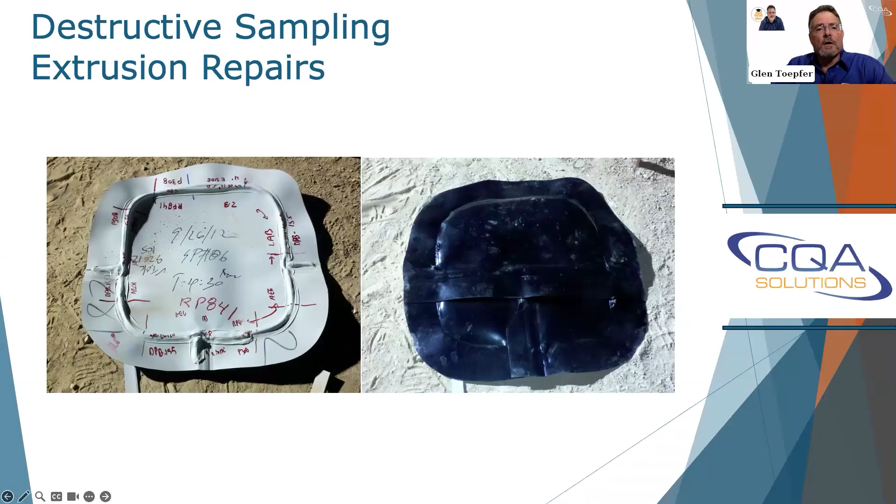I've already touched on your different interfaces. I think extrusion welded patches should be included. I don't like taking destructs on extrusion repairs, such as a destruct repair. I like taking them on the smaller ones where I can get the whole repair cut out, and it can be repaired, but you don't have all this extra welding going over, overlapping extrusion welds like you do if you put it on a destruct patch. So I think you end up with a better quality weld in that regard. It allows you to examine the sheet.

Destructive sampling tracking - you need to verify that the tracking's been done. And where would this sample be? This is destruct 20B on a project we're auditing. We come out there, there's no tracking, nothing's been done. Well, if it's a before sample, do you know where to go? We don't have the paperwork in some instances, if we're auditing.

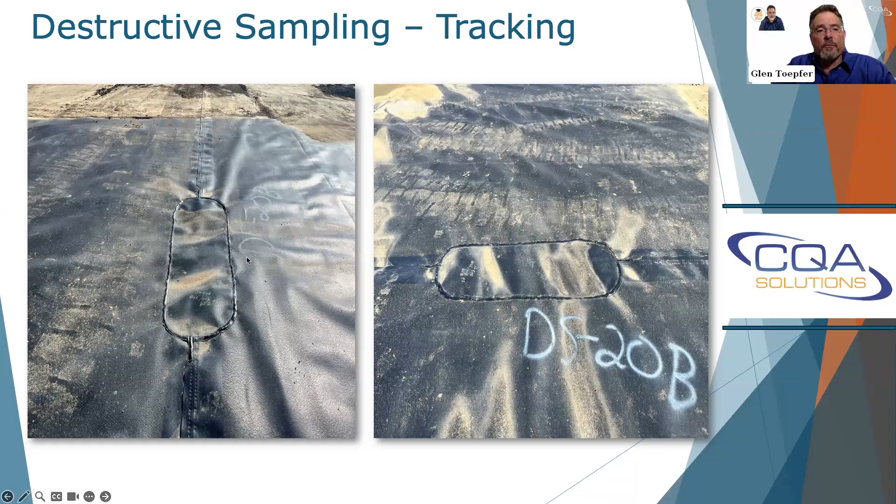If this is a before sample, then this sampling would have been up there towards the top of the picture, would have been the original sample. And that's because of a trick we learned in the industry years ago - you put your left foot on the lower sheet facing the seam, down the seam. That'll tell you which sheet was the lower one, the way they welded. Just a little trick there, not really a best practice, but it's a trick to help you out.

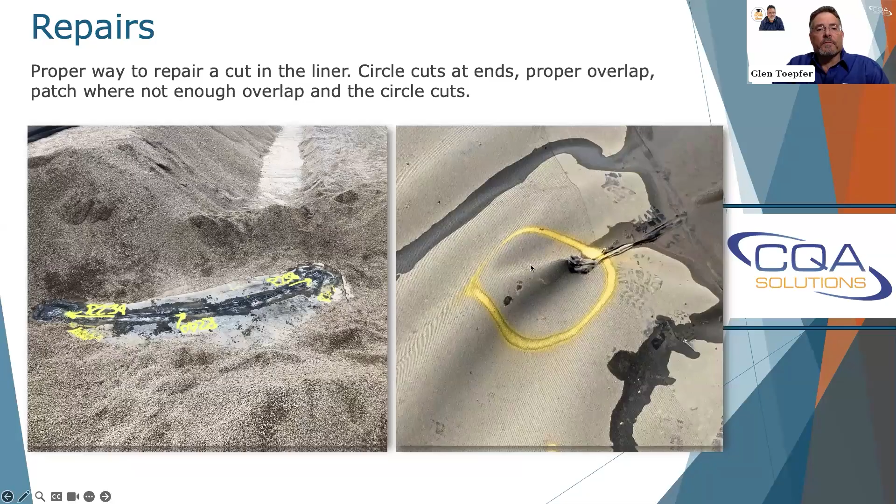Repairs, you need to have proper repairs designated in your specifications. This should have never been terminated like that. They should have had a circle cut at the end and then a patch, cut it out, patch where the overlap doesn't meet the specification.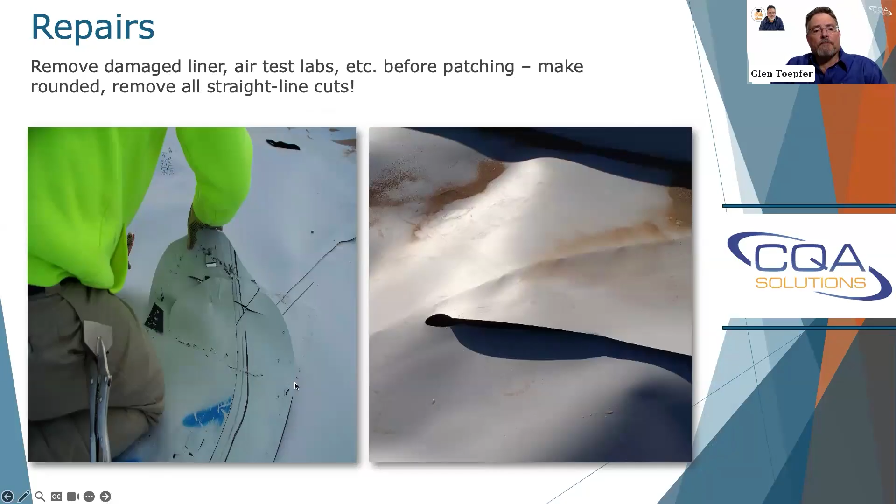Prepare your areas, as I mentioned before, but remove all straight line cuts. They can propagate below the extrusion weld under stress. At the time of repair, have the operator note it in case something fails.

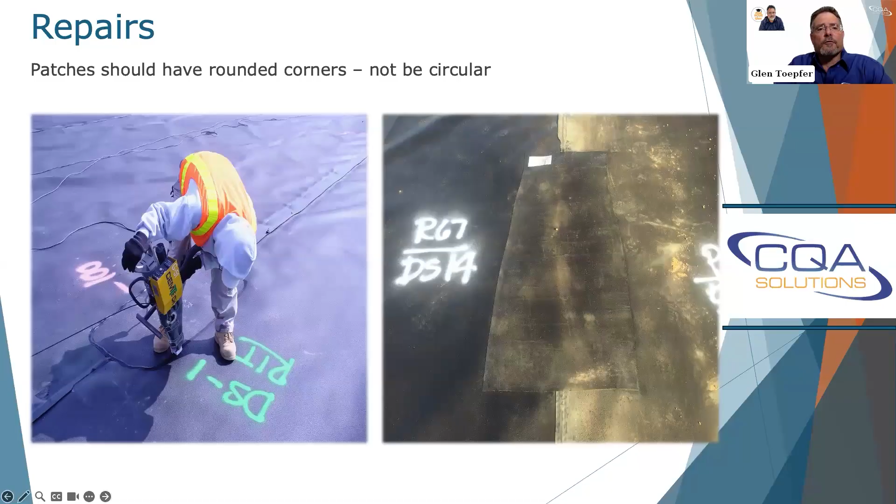Circular patches are not what I understand to be a best practice. They should be a rectangular patch with a radius rounded. This one's improper on the right.

And this one's another one. It's a circular patch. What happens on the circular patch is that people don't apply the extrusion welders with uniform pressure because they're at an angle. That just leads to an inferior quality weld in most instances. You can reduce that by having the rectangular patch with the rounded corners.

Temporary patches, they should always be marked. They should always be pulled up because moisture will end up underneath them.

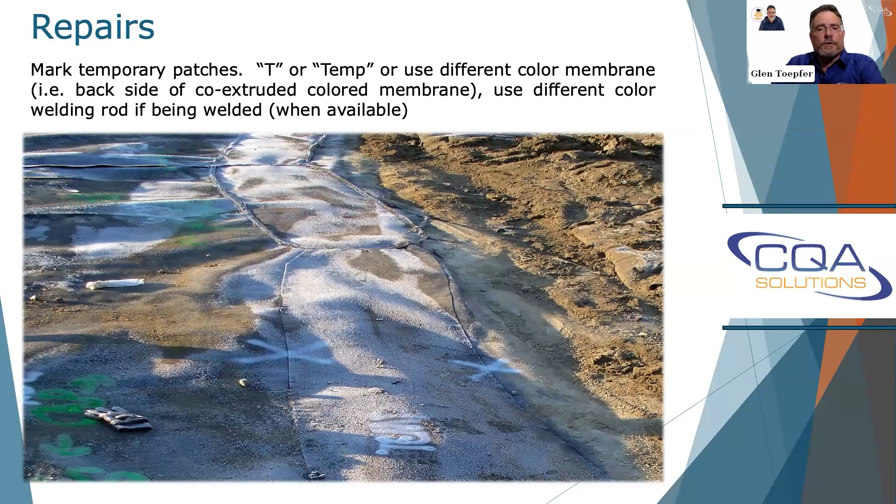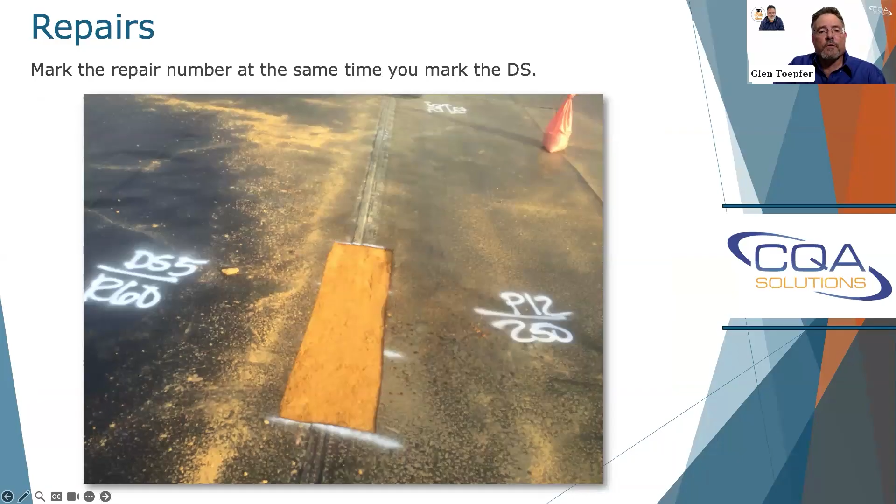Mark the repair number at the same time you mark a destruct. The important thing is to log it. Again, they should be round in the corners here, best practice, so you don't have any straight line cuts that can propagate.

Mark damages whenever you find them. Make sure to log them. Sometimes dust or whatever, things get buried, so you want to have them logged on your repair log so you can find them again.

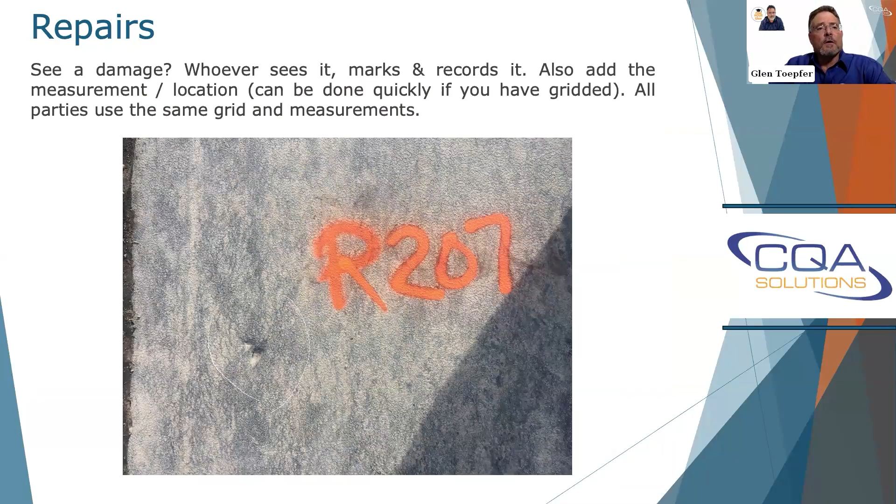Discuss proper repair procedures. Limit the number of beads on extrusion repairs. You don't want to have a destruct patch with 4 or 5 extrusion beads on it to fix leaks or overgrinds and such. That's reheating the patch.

At that point, they should be cut out and redone. Every time you're putting an extrusion bead on a weld that's already there, you're overheating it and reducing the quality in that area.

Fusion weld caps over a certain amount of feet at Palo Verde - that's what we did. We had a 10-foot limit on extrusion welds, 10-foot limit on patches. If it was longer than that, it had to be cut out and fusion welded. That's a better practice to minimize your extrusion welding.

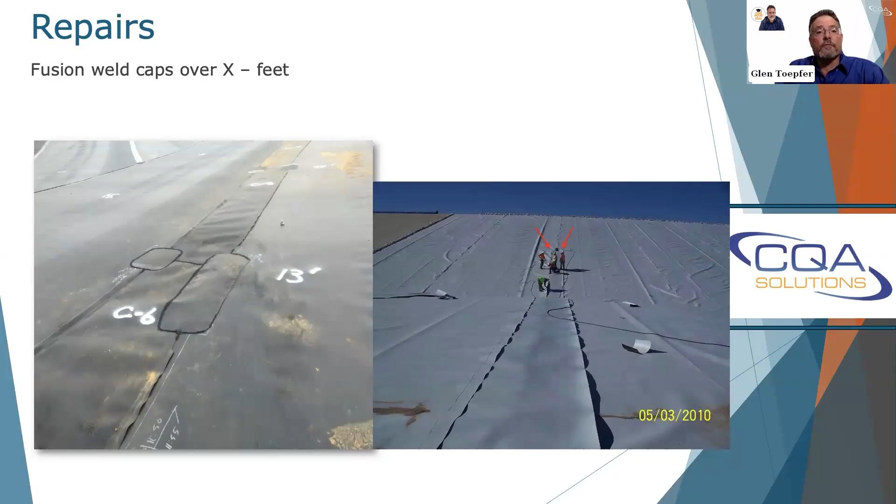But a lot of people don't use these practices, unfortunately. Final walkthrough, I put in there - it's a no-brainer. I mean, it seems like you'd want to catch what's out there, but a lot of people don't do it, and things get missed for that reason.

You need to have foot traffic control while you're out there. If things get completed, keep people off of it. There's nothing worse than having a 40-acre project and people walking all across the geomembrane that's already been walked. At that point, you really need to rewalk it again. People damage stuff, so keep them off.

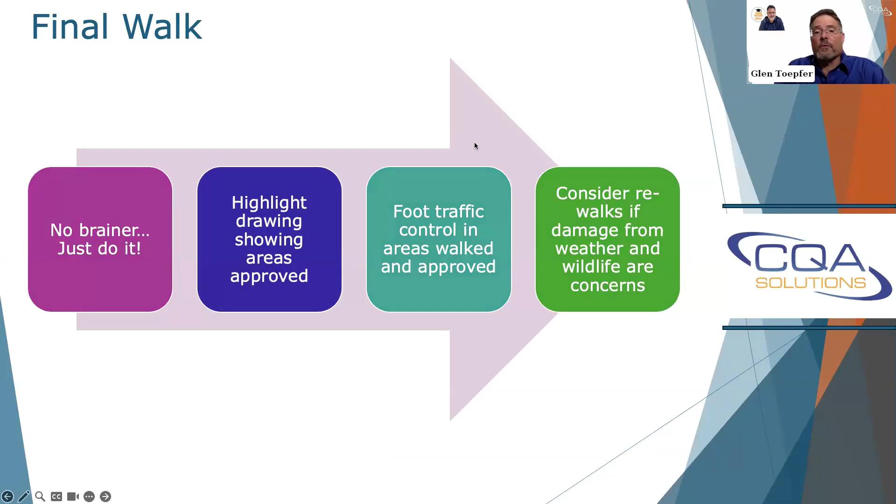Cable ties, there's a lot I could get into, but I just picked out a couple highlights. A lot of times people take them, so installers end up having to go out and buy them. What are you buying? Some are for indoor use only - do they qualify? It's never specified, so I don't have a good answer on that, but you're not getting the same quality cable tie in most instances.

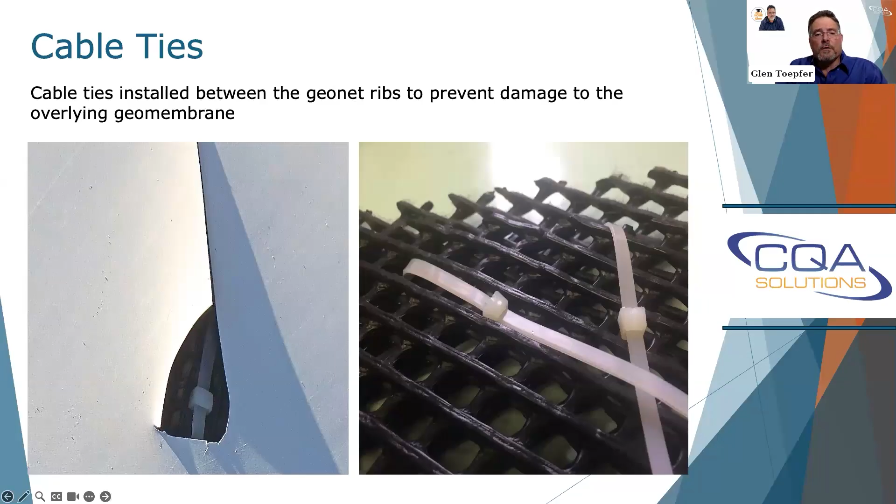Another thing is how you tie them. We found on some projects, if they're tied across the ribs, and you put materials over top, the heads protrude and cause damage like here to the geomembrane. So you should tie them in the channel, and they can be done successfully in the channel.

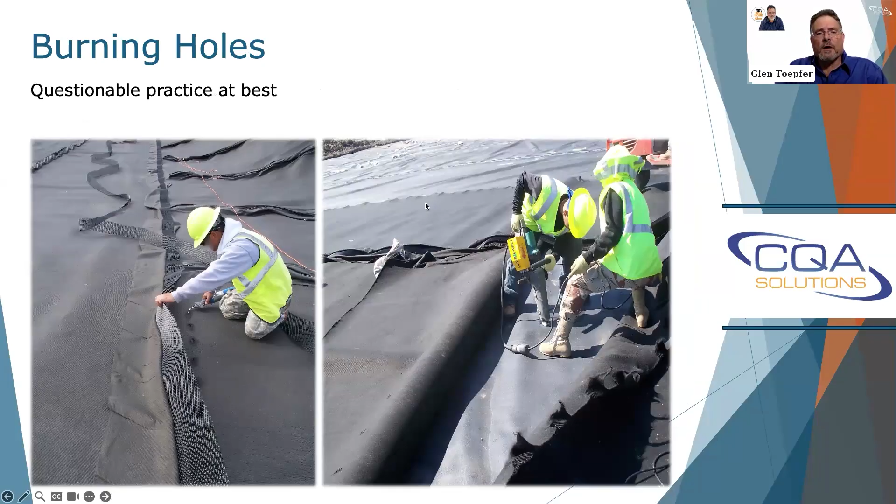Burning holes is a questionable practice at best. I think there are better procedures that can be used. If you're dealing with composite, I don't think you should use burning because it results in a lot more repairs. Typically a lot of times you don't see it either - people won't pull it back up, don't catch it, things get missed. Not a good scenario.

Re-inspecting cable ties - I know I'm coming up on the hour here. I've got a couple slides left, so hang around. And yeah, cable ties, we've learned that in the heat they tend to open up.

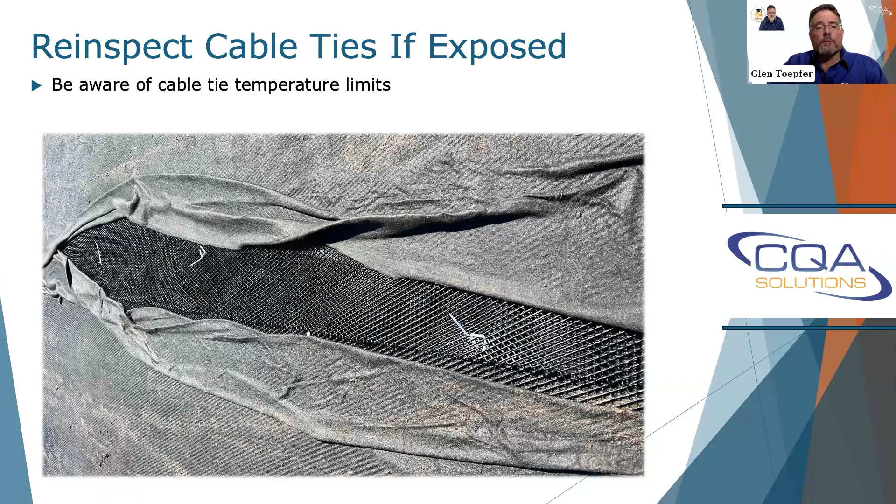The heat increases the spacing. It allows the buckle to expand in the heat, and the cable ties slip out. So they should be re-inspected before things are sealed up if they've been exposed to the heat.

Fusion welding - if fusion welding of the geotextile layers around, use a dedicated wedge.

Because we've found that people trying to switch back, for one, the settings get mixed up, your pressures get mixed up, so you have a hard time on the geomembrane. But sometimes those resins from the geotextile end up contaminating the wedge welder, and you end up with issues trying to weld the geomembrane.

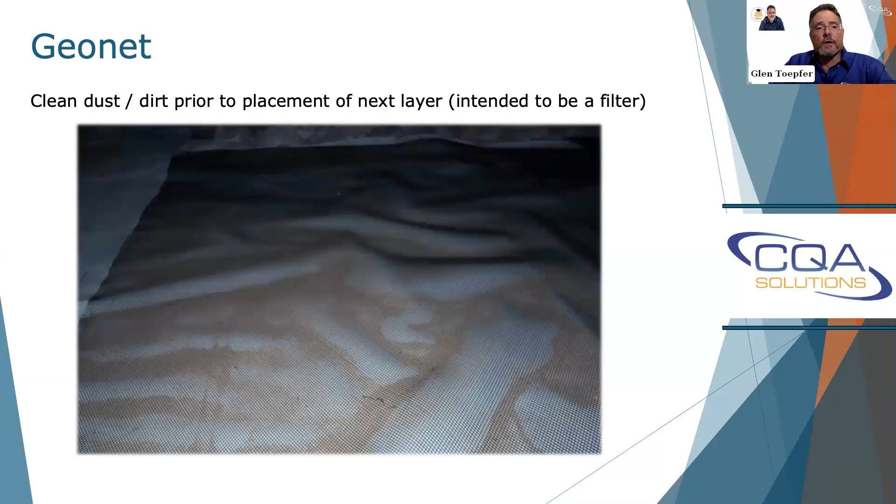Geonet, of course, cleaning dust, dirt, seagull crap, things like that need to be done before placing the next layer.

Cover soils, mark contour changes. I mentioned in the past webinar, GPS doesn't always consider these. If the installer or the operator wasn't given a new contour map to go with, there's a good chance they're going to hit the toe, damage the toe. So it's a good idea to put something there that marks the contour changes.

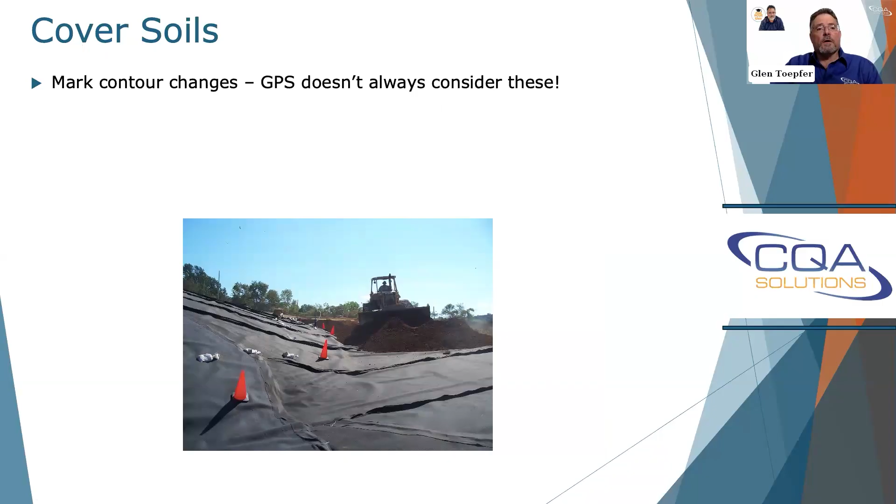And with that, that's the last thing I have in this webinar. I know that I can go on more in the future about best practices, and I think I have another webinar dedicated sometime this year to more best practices. I thank you for joining me this time.